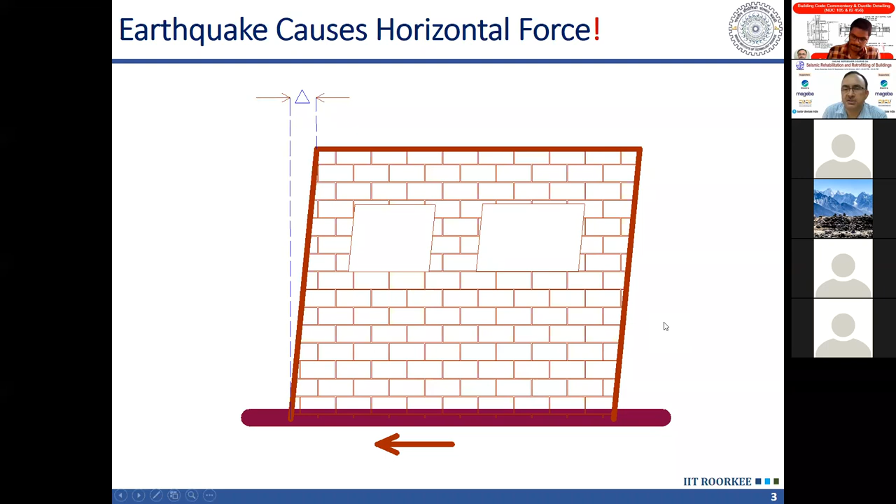The other peculiar characteristic of this earthquake signature, which I had shown you, is that the acceleration is changing its direction rapidly. So it is a reversible type of force acting on our structure, changing direction very rapidly within a fraction of a second, and the total duration is roughly 30 seconds. Within those 30 seconds, you can see how many times it has changed direction.

If we compare it with the other forces we design our structures for - dead load, live load, and wind load - dead load and live load are in the vertical direction, and as I said, our structures are inherently quite strong in the vertical direction, so there is no issue. Easily we can design for dead load and live load. Wind load is in the horizontal direction, which is the similarity with earthquake.

On the other hand, in case of earthquake, the acceleration is fluctuating and changing around the zero line - it is changing its direction. So it is a reverse cyclic type of force acting on the structure, and we take advantage of this reverse cyclic loading, which I am going to discuss soon. This reverse cyclic nature is very important for us in designing structures.

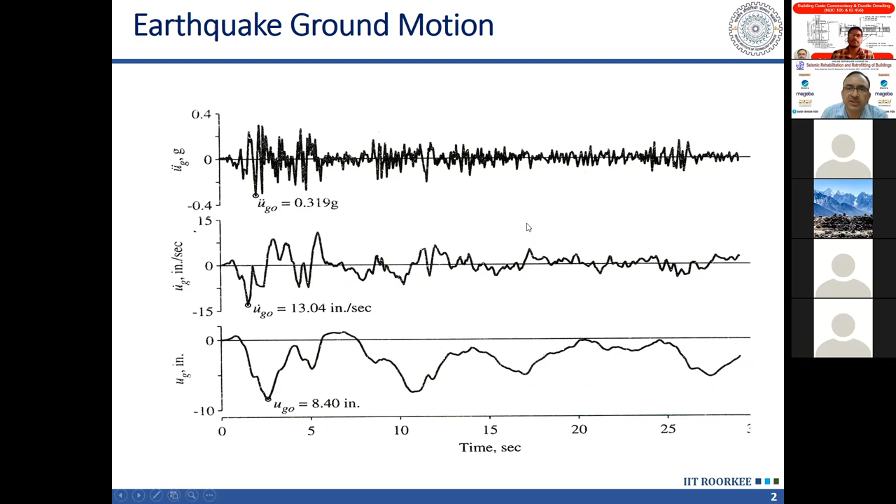To help with that, we have these codes, and I will tell you how the code helps in this.

The first question we have to answer is which earthquake should I design for. If you take some past well-known earthquakes which caused large scale damage, their signatures are very different. Any two earthquakes will never have the same signature, the same accelerogram. So accelerograms are going to be different, and it becomes difficult to decide which recorded earthquake I should use, because the earthquake that will actually affect my structure will be different than all those recorded in the past. So it is a really tough question, which one I should take.

To answer this, we try to understand the different characteristics of ground motions that govern the damage potential of a ground motion. There are three characteristics. One is amplitude of ground motion, which is the peak ground acceleration, peak ground velocity, or peak ground displacement, in short PGA, PGV, and PGD. The larger the amplitude, the more damaging the earthquake will be.

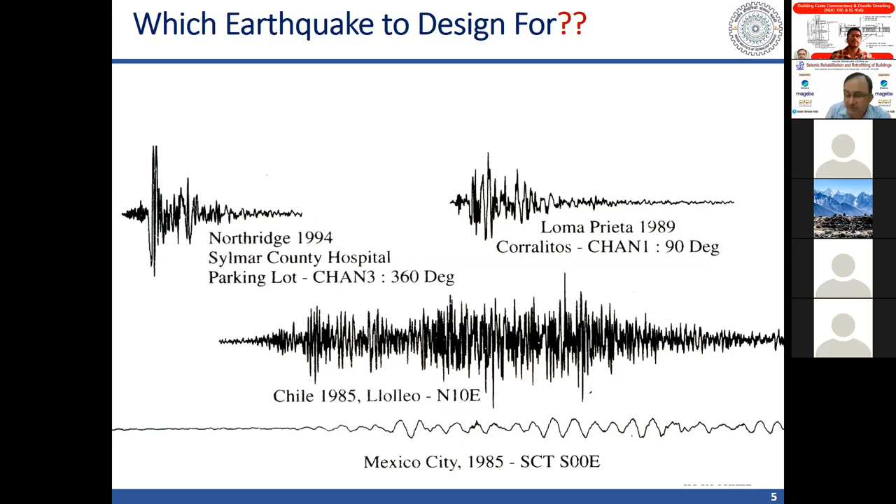So that's why the duration of earthquake is also important. In our modern analysis, using nonlinear time history analysis, we take into account the duration of earthquake also. But in our conventional analysis, we take into account the first two characteristics of the ground motion: amplitude of ground motion and frequency content. Both these properties together can be represented by response spectrum.

I do not know whether you are familiar with the concept of response spectrum or not, but for the benefit of your understanding, I will tell something about that. So if you have a single degree freedom system, you are aware of the concept of the single degree freedom system. It is a simple structure consisting of one mass connected by one column.

So all the mass is here, the column is weightless, and here all the mass is there, and the column is providing the stiffness and damping. This can also be represented by a spring, mass, and dashpot - that is the analytical representation of the same thing. Physically, it represents a single degree freedom system, meaning a single story building. So a single story building, or a water tank, or a column pier can be thought to be similar to the single degree freedom system.

And when the single degree freedom system is subjected to the earthquake ground motion, we will get a response here. So acceleration of this mass will be different than the acceleration of the ground. That will depend on the stiffness and mass, or in other words, the period of vibration of this single degree freedom system. So the period of vibration, or frequency, and damping of this single degree freedom system will decide what response we are going to get.

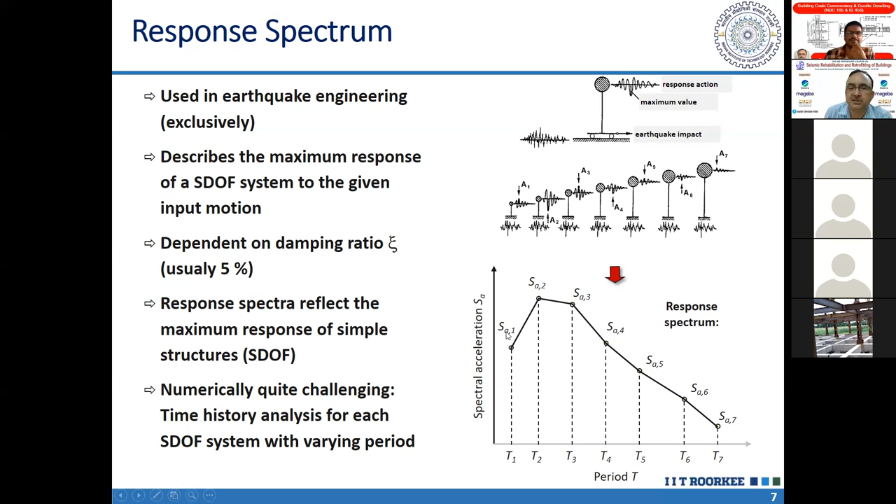It is spectral acceleration. Spectral acceleration is the ratio of the force occurring in this column to the mass - force divided by mass, or force per unit mass. That is the spectral acceleration I can read from this response spectrum.

If I do this for one earthquake, I get a plot like this. Corresponding to zero period here - zero period means my structure has frequency equal to 1 upon 0, infinite frequency. So which type of structure does this represent?

It represents a very rigid structure, which is not vibrating at all. It is moving along with the ground, like a huge block of concrete embedded in the ground, moving along with it. That's why its acceleration will be the same as that of the ground, so the peak value at zero period will be the peak value of this rigid block.

This is nothing but very close to the PGA, peak ground acceleration, and it is called EPGA. Sometimes people just write PGA, but it is not exactly equal - it is close to PGA, but more precisely we call it effective peak ground acceleration, or EPGA. This is very important and used in all our codes, Indian as well as Nepalese. So EPGA means if I have a very rigid concrete block subjected to earthquake shaking, whatever is the peak acceleration of that block, which will be very close to PGA, that we call EPGA.

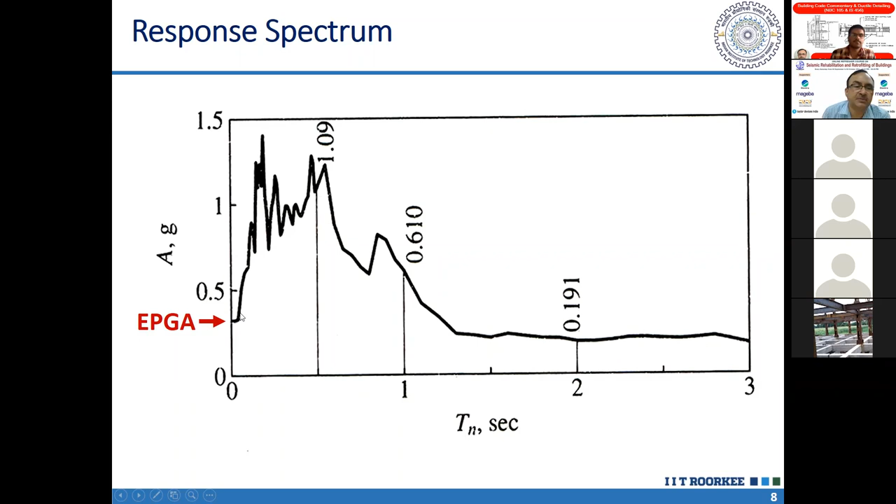And beyond this, it is called long period range, and this is also called velocity control range. So up to 4 seconds, this is velocity control range. If we go beyond that, there is another range which reduces even more rapidly, which we call displacement control range, where the response is controlled by the displacement of the ground. So 3 ranges in response spectrum.

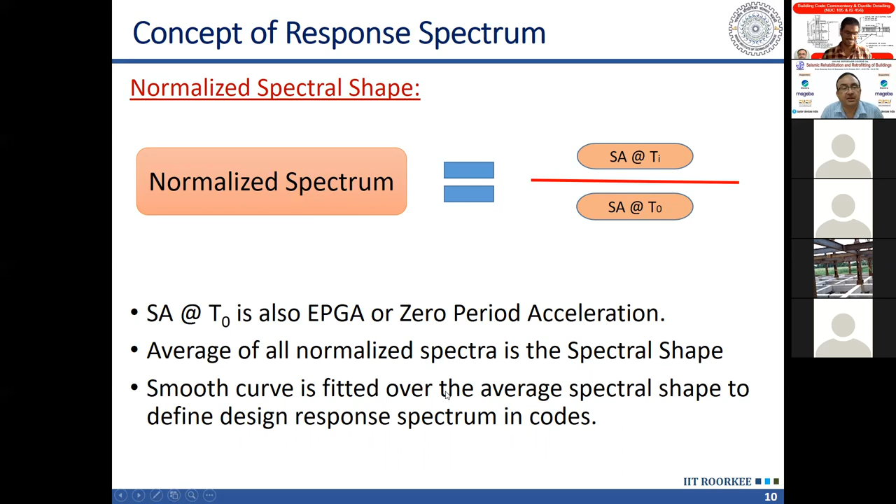I am not getting that video. It's on the left bottom side, sir. Yeah, left bottom. I'm having mute. Stop video after that, start video, stop video. So I have to choose to go, click on virtual background.

Choose virtual background. Okay, I will say none. Somehow my system has remembered that, and that's it. I think that is good, it has gone.

Now we can see your office. I'm sorry, sir, I was seeing it from long back but I thought you had said something, so I was worried I was not able to see, because I was not seeing my video. So anyway, thank you, Tajul.

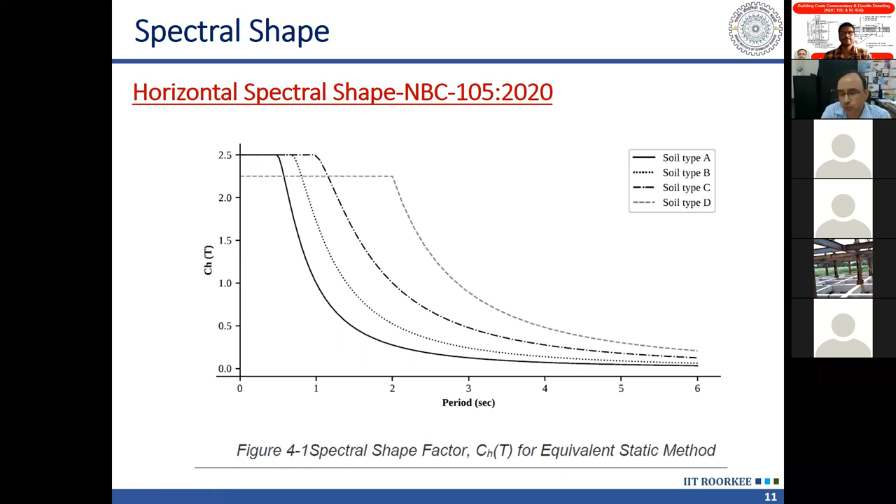All right, so let's continue with our discussion. We were talking about this concept of response spectrum and spectral shape. These spectral shapes are idealized spectral shapes, sort of envelopes, so that for most recorded earthquakes, the response spectrum lies below this or close to this. There should not be large difference.

And the shape depends upon the soil class type. You can see that the width of this flat region depends on the soil type. If you compare it, I will show later a comparison with the Indian code, this is much wider than the Indian code, and I will tell you the reason. In the beginning I said there are some aspects in this code which are more advanced than the Indian code. This is one of those.

So you can see the shape of the response spectra are very different depending on the soil type. Soil type can change the earthquake forces acting on a structure drastically. So far, we have not been giving so much importance to the soil type or site class. Depending on what type of soil or site we have, the earthquake force can increase many times.

For example, if your building is, let us say, 20-story, 2-second period, at 2-second period see how much is the difference. If your structure is on rock, then it is something like 0.3. On the other hand, if it is on soil type D, then you can see it is 2.2. So from 0.3 to 2.2, that's a 7 times increase in the forces. And if somebody has made a mistake in designing a 20-story building in determining its site class...

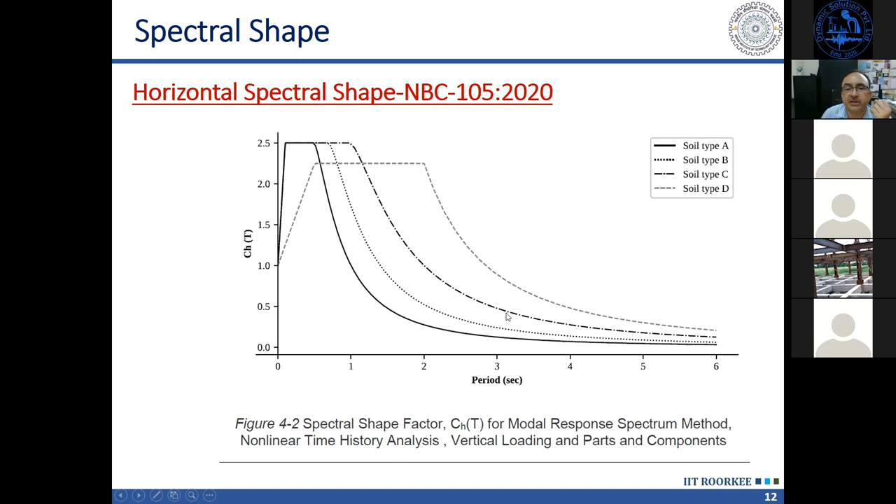Now, why this such large period? Is it possible to have such a flat range? Earlier, if you compare with the Indian code, even the current Indian code, it varies from 0.4 to 0.7, so even for soil type 3 it is 0.7. And here we are talking about 2 seconds, a flat region up to 2 seconds. Why? Is it reasonable? The answer lies in the recent earthquake recording in Kathmandu. In Kathmandu Valley, this was the record.

For such a situation, we have to take care like this. Earlier it was thought that soft soil deposit is a problem of plain areas, flat areas, foothills, the Tarai region. But we are seeing even in valleys deep within the hills, within the Himalaya, wherever we have valleys like Kathmandu Valley, this problem is very severe. So this soil amplification is applicable to hilly regions as well, and the Gorkha earthquake has taught us this lesson.

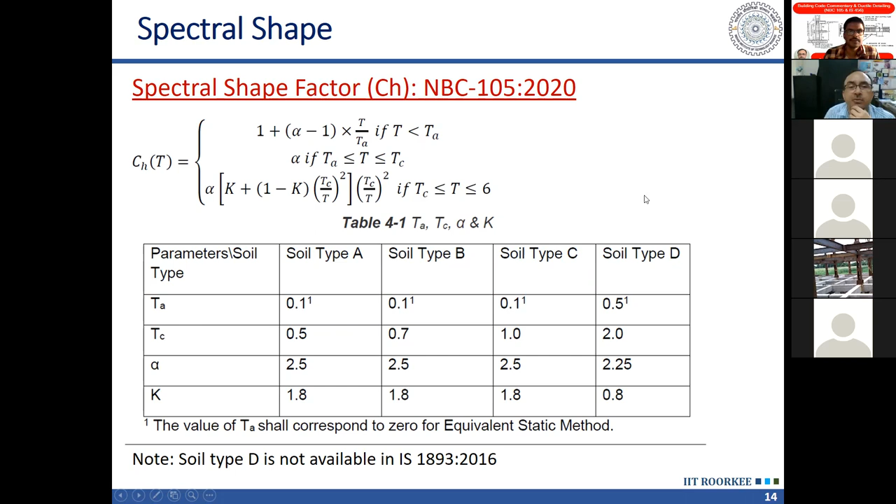Okay, so the same shape is described in terms of these equations and coefficients. These are self-explanatory. Depending on which type of soil you have, you read the value of Ta, Tc, alpha, and K, put them into these formulas, and you will be able to plot the response spectrum.

Okay, now let us compare these provisions with the Indian code. Let us see what happens in case of soil type A. Soil type A is actually rock. In both codes, this is very stiff soil, so it is similar in both. If my structure is located on rock, then soil class A will be applicable.

We can see that the maximum amplification is 2.5 times; in the shape, the maximum value is 2.5. The flat region continues from 0.1 second to 0.5 second. In the Indian code, on rock it continues from 0.1 second to 0.4 second, not 0.5. So here it has been slightly flattened.

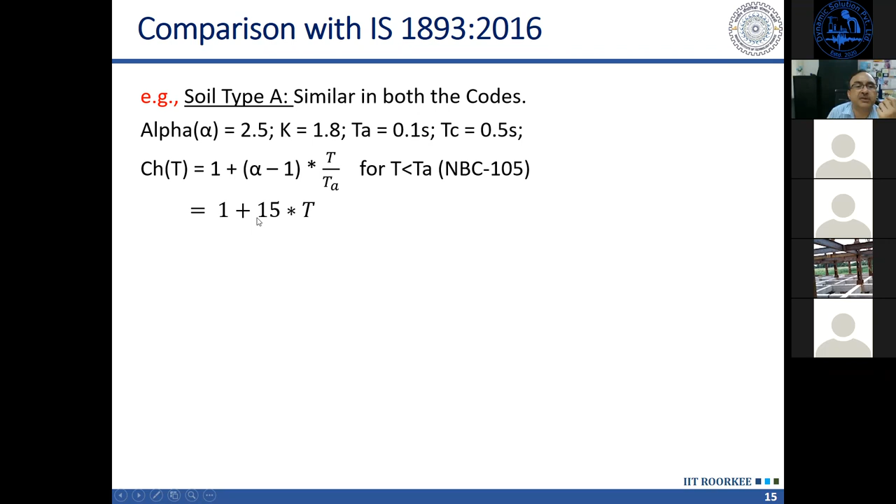And this part, from 0 to 0.1 second, is the same - it comes out to be identical. If you substitute the value of alpha as 2.5 here, you can see it comes out to be the same, 1 plus 15t, as given in the Indian code. So this part is similar, but here we have a significant change.

In the Indian code, in the velocity control range, it is given as 1 by t. Whereas here you see this equation, which means it comes out to be some constant divided by t square minus some constant divided by t to the 4th. So it is reducing with the power of t to the 4 or t to the 2, meaning there is much more rapid reduction.

So there is a very steep reduction in the Nepalese code as compared to the Indian code. In the Indian code, the decrease is relatively mild - proportional to 1 upon t, whereas here it is proportional to 1 upon t to the power 4. So that difference is there. This is a difference from IS 1893.

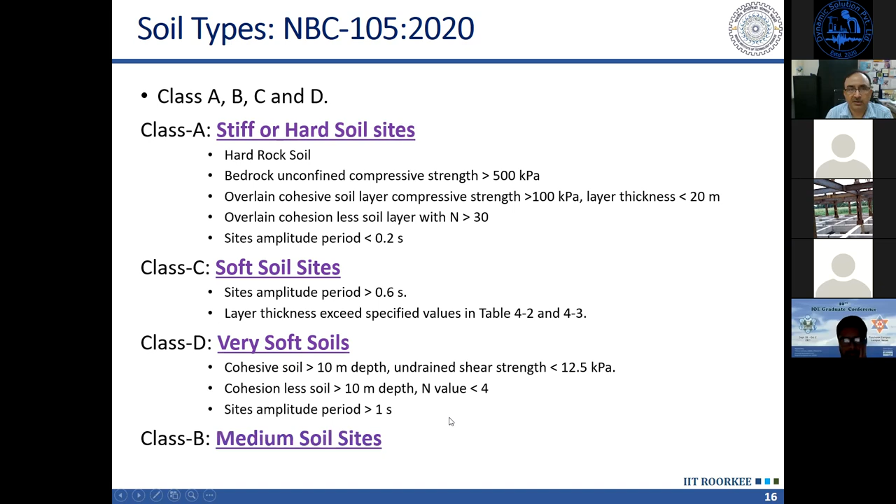Now, different types of soil classifications. In the code, depending on the N value and the type of soil, we can define a site class. A table is given in the code where you can define what soft soil, firm soil, and stiff soil mean based on the depth and undrained shear strength, as well as, in case of cohesionless soil, based on the N value. So here we use N value, here we use undrained shear strength, and accordingly you can define which type of soil it is and assign a site class to it.

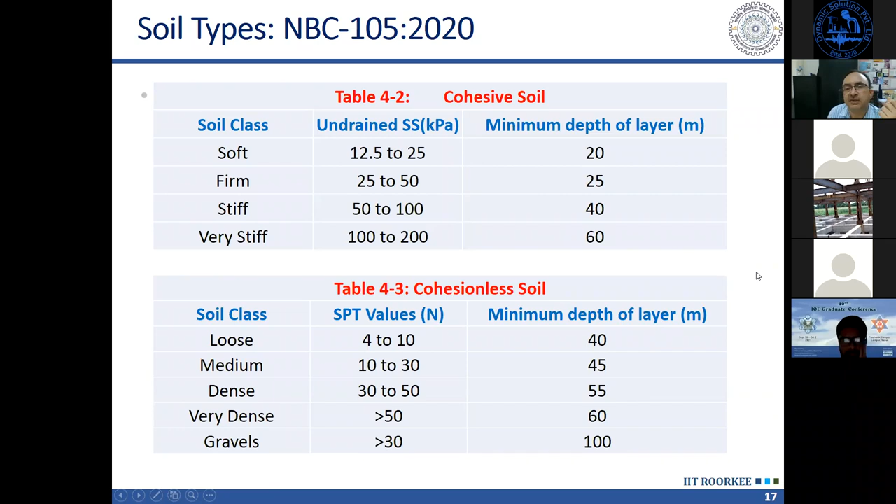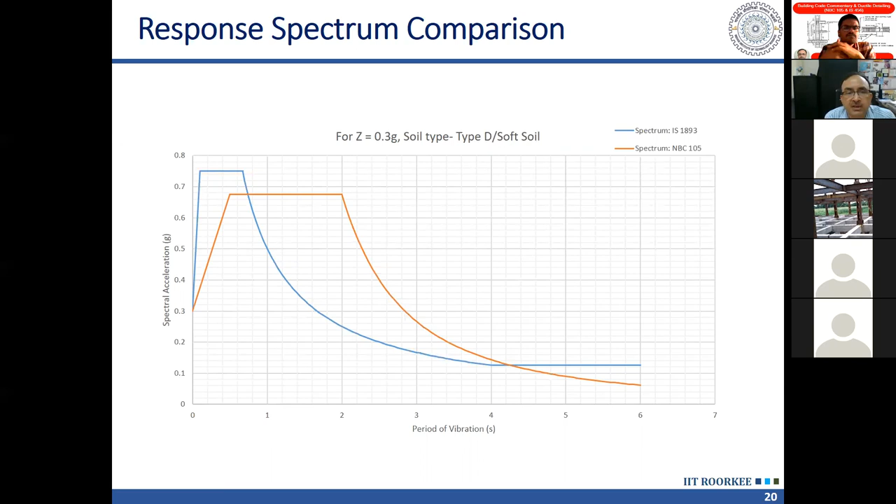We can see how much difference is there in the two codes, especially close to this 2-second period. Between 1 second to 3 seconds, there is a large difference, and most of our buildings will be here. So I'm sure that after this code, the design of buildings in Kathmandu area, where you have the deep soft soil type D, is going to change drastically. The forces in Kathmandu area for design of buildings are going to change a lot after this code, and those are for good.

If you are using, on the other hand, this Indian code, then your design will be non-conservative.

Now, in our quest to define the earthquake level which we should use in our design, we have to define the level of earthquake. So the level of earthquake, which we call hazard level, we define in terms of either a return period or a probability of exceedance. Commonly used probabilities of exceedance are: 50% in 50 years, 20% in 50 years, 10% in 50 years, 5% in 50 years, and 2% in 50 years.

Why 50 years? Because we consider the normal design life of our buildings as 50 years. In case of bridges, it may be more, 100 years or 75 years. But in buildings, usually we consider 50 years as the design life. So the probability of exceedance in the life span of the structure, our buildings. So 2% in 50 years, this is the minimum probability within the lifespan of the structure we have considered, which we call maximum considered earthquake, MCE, and its return period is 2,500 years.

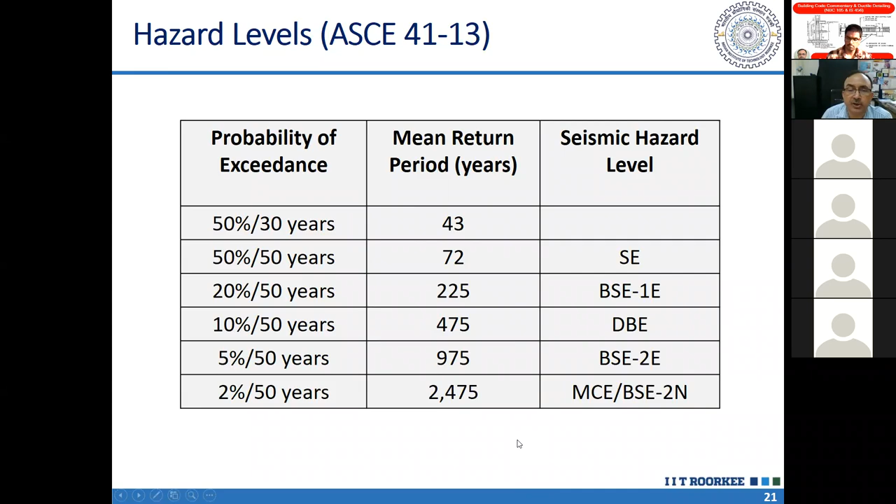Then I have to calculate the earthquake forces, and we use load combinations for design. The load combination given in NBC105 is dead load plus lambda times live load plus earthquake load. Dead load is taken with load factor 1, earthquake load is also taken with load factor 1, and live load is multiplied by this factor lambda, which is actually less than 1 — a fraction, 0.3 or 0.6. I will explain this later from NBC. So this value of lambda is less than 1, either 0.3 or 0.6.

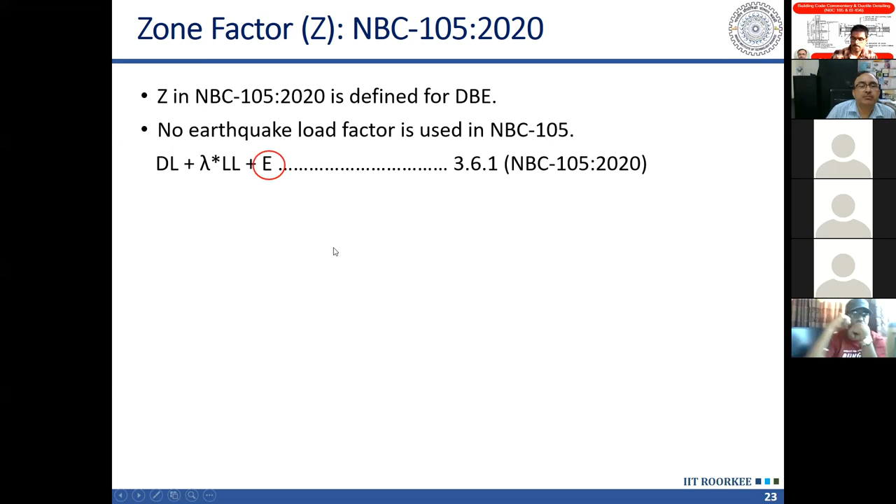This is different from the Indian code. If you compare with the Indian code, here there is no load factor for E, earthquake load, whereas in IS code there is a load factor of 1.2 and 1.5. Two load cases are there: 1.2 dead load plus live load plus earthquake load, and 1.5 dead load plus 1.5 earthquake load. Actually, the governing case is 1.5 dead load plus 1.5 earthquake load, not 1.2 dead load plus live load plus earthquake load.

So this 1.5 factor is actually converting the zone factor. It is not really a load factor, it is a correction factor, because the zone factor adopted in Indian code does not correspond to DBE or MCE. When you multiply it by the 1.5 load factor, it becomes MCE.

So if you compare the zero period acceleration corresponding to DBE from Indian code, for zone 5, which is closest to the Nepal hazard, you can see it will be 1.5 into 0.36, which becomes MCE. Then from MCE to convert to DBE, it divides by 2. So the relationship between MCE and DBE in Indian code is 1:2 — DBE is half of MCE. At some places like the US, that relationship is 1/1.5. That's why there, the relationship to convert MCE to DBE is 2/3 or 1/1.5. In Indian code, it is 1/2, so that comes out to be 0.27.

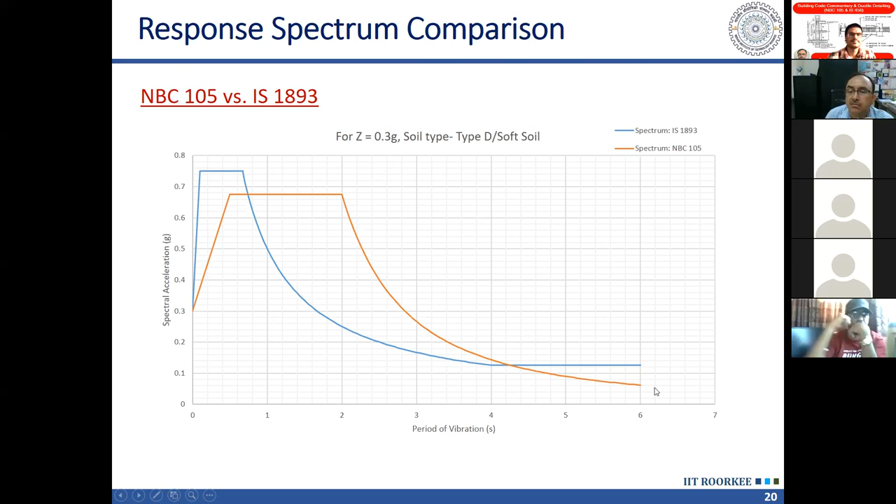This is more logical value which is adopted in Nepalese code. I can understand a lot of problems must be going on currently because the zone factor has increased, the shape of the response spectrum has been changed, and when you consider both effects, the forces on the buildings will be increased tremendously.

The design forces coming on buildings as per this revised NBC will be much higher than what you get from Indian code. These values are more reasonable, let me tell you. The values coming from Indian code are on the lower side, and soon Indian code will also be revised and updated.

I do not know whether those will match exactly with Nepalese code, but those will be close. Earthquake effect is predominantly in horizontal direction, but that doesn't mean earthquake causes only horizontal acceleration. Earthquake causes both horizontal and vertical acceleration, horizontal in two directions and then vertical. So all three components are there, and in general we should consider all three.

So vertical component of earthquake is also important. Previously the codes were not taking into account the vertical ordinate. Now in this NBC105 2020, the vertical component, or this shape of the response spectrum, Cv(Tv), where Tv is the period of structure in vibration in vertical direction.

There appears to be some error in this formula. It is given Cv(Tv) equals 2/3 Z. There is a general understanding world over that the vertical component of earthquake is roughly 2/3 of the stronger horizontal component. But in this formula, Cv(Tv) is actually representing the spectral acceleration, and Z is zero period acceleration. So there should be Ch(Tv) also, which appears to be missing. This means the response spectrum would remain constant, which is not possible.

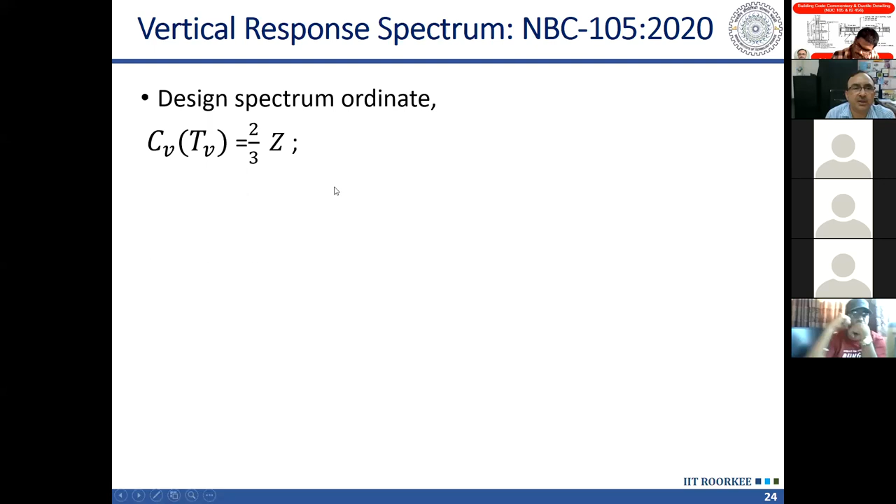What I feel is that it should have been multiplied by CH also, which we have in case of horizontal seismic coefficient. So that should also come. Please check and also discuss it with the code committee, they may look into it. There appears to be a typo error here.

As I said, in general vertical component is acting on all structures, and it is good practice to consider the vertical component of earthquake in all cases. In most cases it will not affect the design, because in vertical direction our structures are anyhow quite strong. I told you that in vertical direction 1G acceleration due to gravity is always acting, and there is a factor of safety of 1.5 to 2. So the capacity in vertical direction is very large and it generally doesn't affect the design.

But in some special cases this can affect. When we have long span roofs or bridges, there it is important, where the span is more than 20 meters, the vertical component can affect. When we have horizontal cantilever span greater than 5 meters, like a balcony, then also this vertical component of earthquake motion is important.

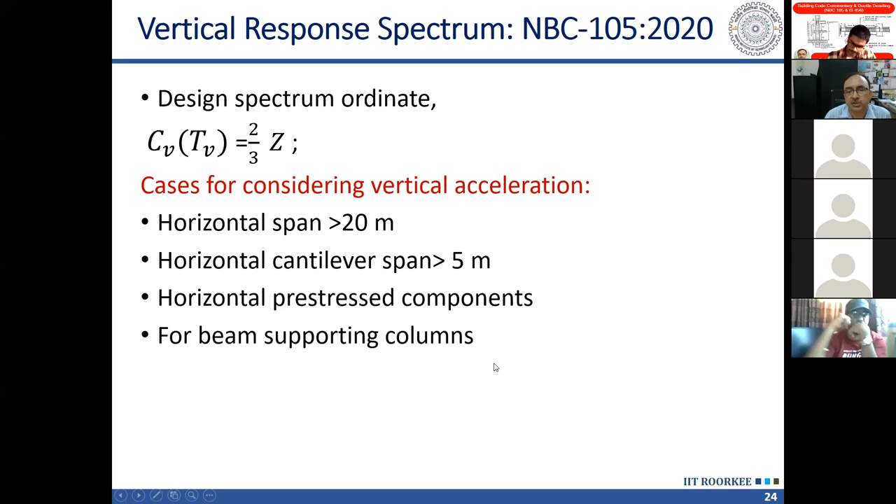And when we have pre-stressed components in horizontal direction, then also we should consider the vertical component. And those beams which are supporting columns, you understand what that means, it means floating columns. So in buildings where you have floating columns, the transfer girders or transfer beams supporting the column need to be designed for this vertical component also, there the vertical component can be important. And then in base isolated structures also it is important.

Now, if I have to calculate the design spectrum ordinate, design spectrum will be calculated from the shape. As I told you earlier, Ch(T) is representing the shape, it is the normalized shape. That shape needs to be multiplied by Z, and another factor is importance factor. Importance factor depends on the uses of the building, what are the post-earthquake uses of the building, and is there any post-earthquake hazard due to that building. So that importance factor will come from there.

I have written here, although it is not given in the code explicitly, please see this note is from our side, that here the Z is to be replaced by 2/3 Z, rest of it should remain the same. So rather than what is given here that Cv(Tv) is 2/3 Z, the C in vertical direction should be equal to Ch(T).

This Ch(T) will remain same. Only thing is that in place of T, we will have TV, and this should be 2/3 Z. That's how it should be used, like we are doing 2/3 of the horizontal seismic coefficient in case of Indian code.

In case of Indian code, we use Z/2 to convert MCE to DBE. I discussed that. And in case of NBC, the Z is defined for DBE itself. The Z is not defined for MCE. And this is again a better approach than defining MCE first and then converting it to DBE, because we need a factor to convert from MCE to DBE.

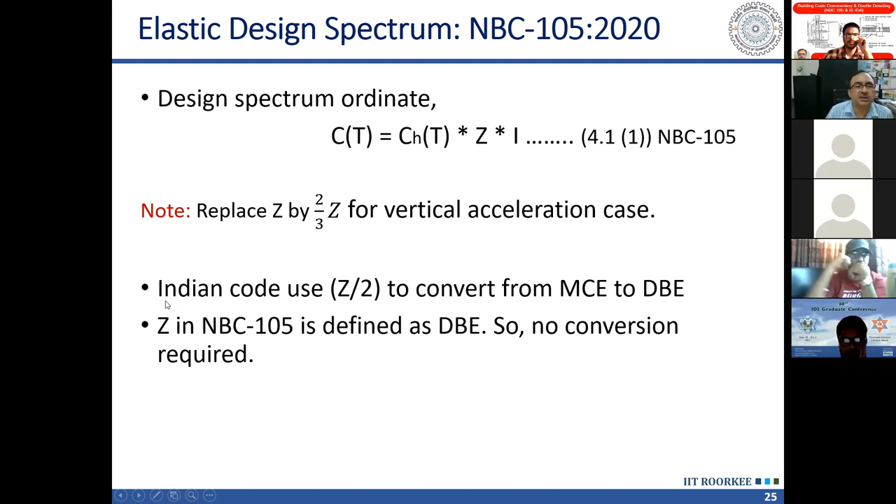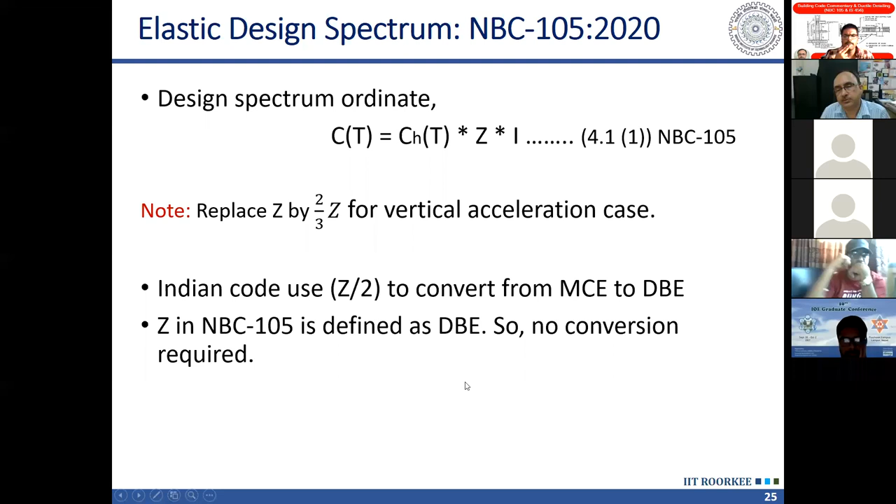In fact, in Europe, this is the practice. If you look at Eurocode, the hazard is defined for DBE, but in American code, the hazard is defined for MCE. So Indian code is similar to American code, and Eurocode is similar to Nepalese code, where the hazard is defined for DBE.

If the earthquake is having all the 3 components, in design also we should take all the 3 components. In general we should consider all the 3 components of earthquake together. But if the structural system is having orthogonal arrangement of lateral load resisting elements - what is meant by orthogonal system? This is a type of system where the beams are perpendicular to each other.

If I apply earthquake in X direction, the beams in Y direction will not be subjected to any force. Similarly, if I apply earthquake in Y direction, the beams in X direction will not be subjected to any earthquake force. But what about columns? Due to earthquake, there is not only force in beams, there are forces in columns also. So for the design of columns, it is important that we consider both the earthquake components.

So I recommend that whatever structure you are designing, please consider both components in all structures. But the code, Indian code as well as Nepalese code, allows us to ignore the other component in case of such systems which are having orthogonal beams and columns.

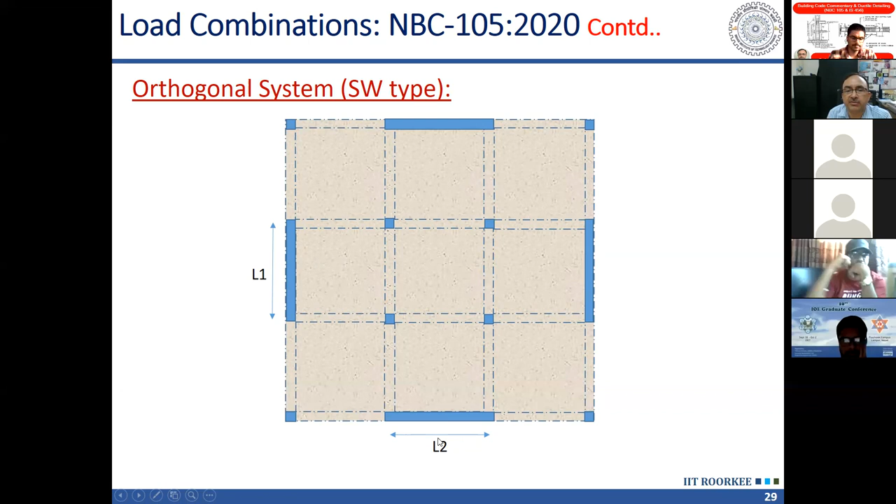This is another orthogonal system where we have shear walls also. When we are applying earthquake force in X direction, then the Y direction components will not be affected. But if we have this type of building configuration where the members are not perpendicular to each other, all the members are not perpendicular to each other,

In case of orthogonal system, the code says that we should consider dead load plus lambda times live load, earthquake in X direction full, and 30% in Z direction. Why 30%? Why not full in Z direction? Z is the vertical direction.

Because if we look at the records of a single earthquake in 3 directions, we will see that those records are non-correlated, meaning they are varying randomly. So when the peak is occurring in one direction, the peak in the other direction is not occurring - it is somewhere below the peak. That's why, because the response spectrum plots the peak response, what we'll be reading from there is the peak response in X and peak response in Z. So both peak responses cannot occur simultaneously.

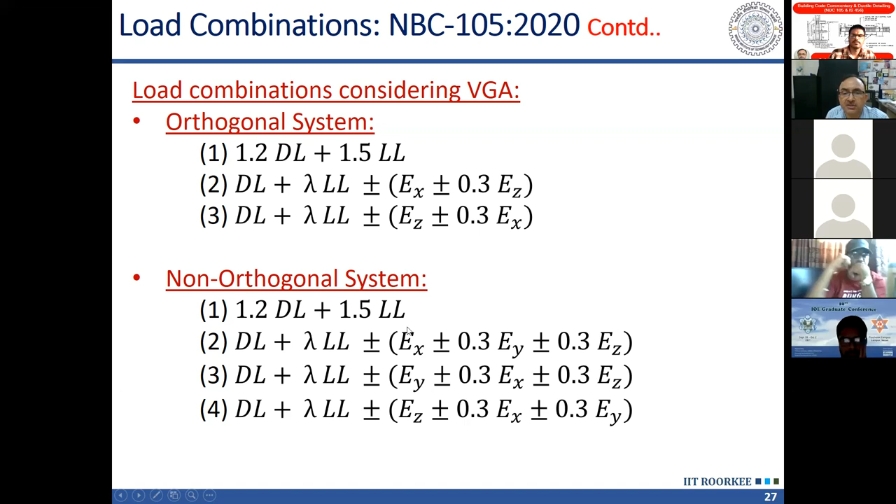That's why we are taking one response as full, other response as 30%. In one combination, X is 100%, Z is 30%. In the other combination, Z is 100%, X is 30%. When we have non-orthogonal systems - and I am saying in case of all systems you should use this - one component is full and the other 2 components are 30%. So first X is full, Y and Z are 30%, then Y is full, X and Z are 30%, then Z is full, and X and Y are 30%. So many combinations you have to consider for earthquake in different directions.

Okay, then importance factor also appeared in our calculation. As I said, that importance factor depends on the uses of the building, for what purpose we are using the building. If the building has some post-earthquake use, for example hospitals, so hospitals will be required after the earthquake, because that's the place where our wounded, injured people will be treated.

So hospitals, then fire stations. After earthquake, there are fires. Then for rescue and relief also, the fire stations are required, or fire brigade people are required. Power stations, so that the power outage is not there. Police headquarters to take care of the command and control after the earthquake has occurred.

Then gas or petroleum distribution facilities. I don't know what is the situation in Kathmandu. Maybe there may be some proposal to have distribution of cooking gas through pipelines. In metros in India, that facility has already come, and it is going to come. We are hearing that in Roorkee also this will be available. So it is good, it is very convenient, but it is dangerous during earthquake. If it fails, if the pipeline ruptures, it will cause fire, post-earthquake fire.

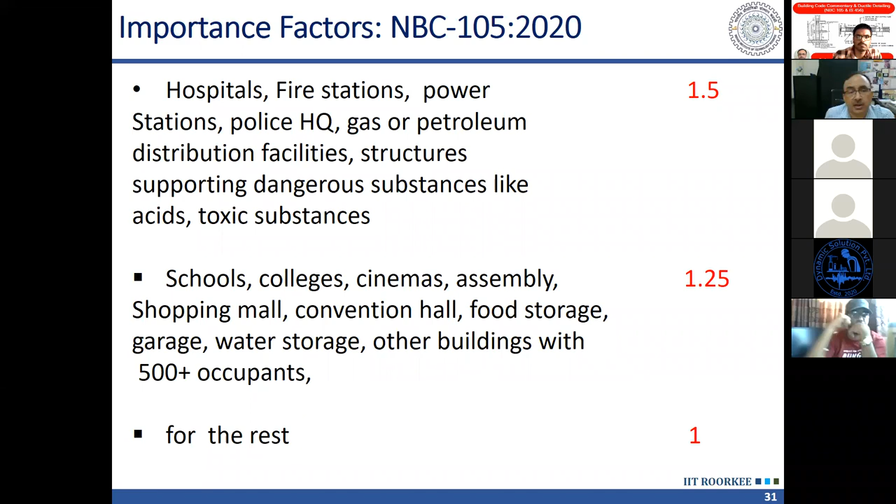So nowadays apartment buildings are coming. In one apartment building itself, there are more than 500 people. So in such buildings, we should have an importance factor of 1.25. This is more or less same in both codes. So this is about the calculation of one aspect of the earthquake force, that is hazard - how to define the hazard and how to calculate our seismic coefficient.

Then another important issue in earthquake is the inelasticity of the structure. We never design our structure to remain elastic during earthquake. So it is going to yield, and when it is yielding, it will have permanent deformation, or what we call plastic deformation or inelastic deformation. So the source of this inelasticity is from the material.

Our structures, RCC structures mostly we are constructing, are made of concrete and steel. Steel is known to be a ductile material. What is meant by ductility? The force goes on increasing rapidly as the deformation increases, or the stress goes on increasing rapidly with strain, up to a point. And at that point, the strain increases either with no increase in the stress or very little increase in the stress. This phenomena is called yielding.

So the point from where the strain starts increasing without increase in stress is similar to flow of fluids. What happens to fluids? The fluids flow under a constant head. If I provide a constant pressure head in a pipe, it will continue to flow. Or if I have an open channel flow with a mild gradient causing a constant head, under that it will go on flowing. So after a particular stress, the metals start behaving like a fluid. This property is called ductility.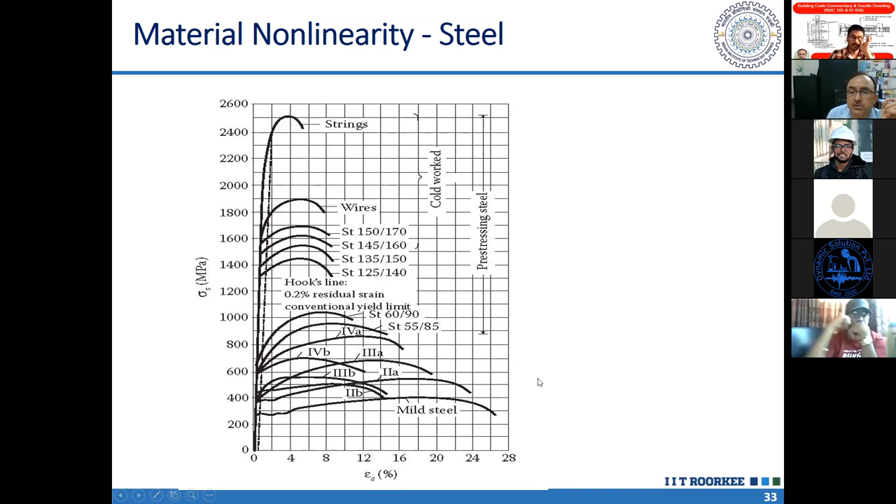Then concrete itself is having nonlinear behavior. Unconfined concrete is very much nonlinear. It achieves a peak and then suddenly it drops its strength - it gets crushed. If we confine the concrete, then we get a much higher strength and much larger ductility, but there is a lot of nonlinearity in this behavior as well.

As a result, the structure which we are constructing - if I apply a force F and measure the displacement on any structure and plot the load displacement curve, the curve will be something like this. It will be linear initially, then yielding will occur, and then it will become nonlinear.

For simplicity in our calculation, we represent this actually nonlinear curve by a simple curve. That simple curve is made of two lines, and we call it bilinear idealization. Bi means two, linear means line. So we are representing it by two lines, bilinear.

This bilinear representation, or bilinear idealization, is done in such a way that the area under the two curves is same. Why are we interested in area? Because the earthquake, which is causing shaking of the building, is actually imparting some energy to the structure, and the structure has to dissipate that energy.

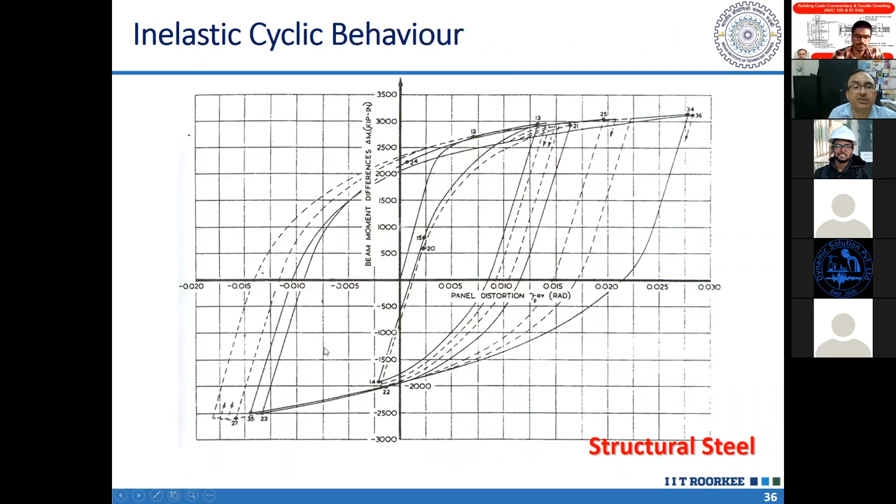Why am I saying hypothetical? Because we never design our structures to remain elastic during earthquake. Rather, our structures yield at some value of Vy. And what is this Vy? This is the point where the two lines in our idealized curve are meeting.

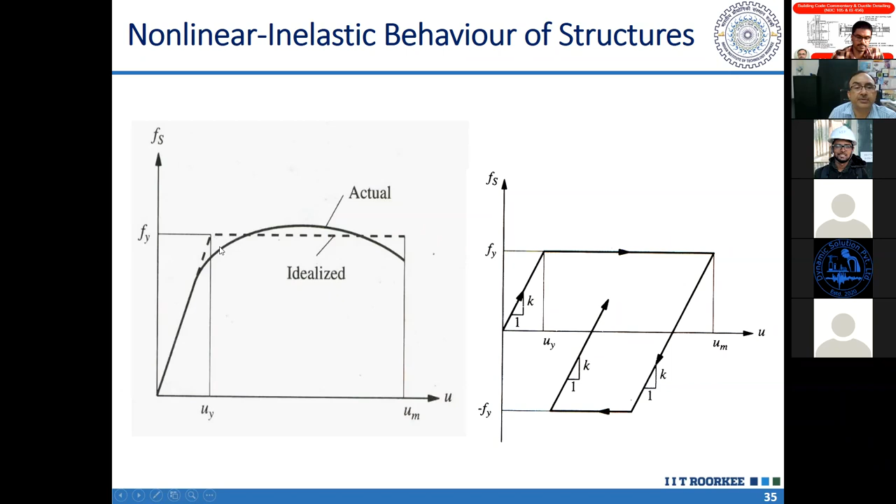So this point is not on the actual load displacement curve. This point is a notional point which lies on this bilinear idealized curve of the load displacement behavior of the structure. So it will yield here, and after yield, the load displacement curve will become flat. The displacement is increasing, but the load is not increasing.

A very interesting observation has been found by researchers analyzing a large number of structures. They found that whether it is a very strong hypothetical structure or a yielding inelastic structure, the maximum displacement remains the same. So this maximum displacement is same as delta E, because whether it is a hypothetical elastic structure or a real yielding structure, the peak displacement will be same.

Delta M will be equal to delta E. And this ratio of V and Vy we represent by R mu, the response reduction factor due to ductility. R mu is defined as the ratio of V by Vy. And from similar triangles, we can see that V by Vy is actually delta E by delta Y, and delta E is same as delta M.

Just now we talked about that observation which we call the equal displacement principle. This principle says that delta M and delta E are the same, so I replace delta E by delta M. Then it becomes delta M by delta Y, and delta M by delta Y is the ductility, the demand ductility on my structure, mu. So R mu is equal to mu. The equal displacement principle suggests that R mu is equal to mu.

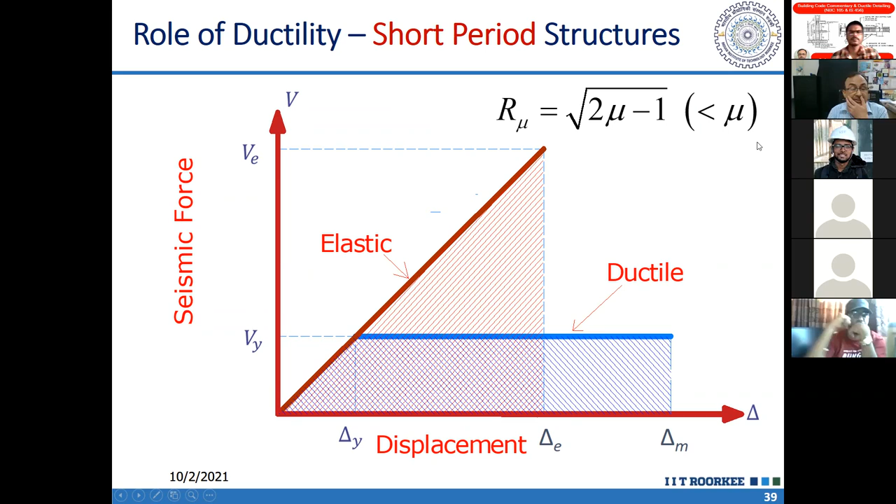And we get this relationship: square root of 2 mu minus 1. In this case, R mu is less than mu, since square root of 2 mu minus 1 is less than mu. So R mu is lower than mu, but still it depends on mu. It is a function of mu only, and mu is the ductility ratio here. So the response reduction factor which we get in our structures depends on the ductility in the structures.

Using this principle, which we call the equal energy principle, we get R mu equals square root of 2 mu minus 1 for short period structures. For long period structures, R mu was equal to mu, using the equal displacement principle. In case of short period structures, which structures do we call short period? Those structures lying in the acceleration control range are called short period structures. As per Indian code, those structures having a period less than 0.7 seconds are called short period.

As per Nepalese code, that period will vary depending on the soil also. In case of stiff soil or rock, structures having period less than 0.5 seconds will be called short period. But in case of very soft soil, structures having period even up to 2 seconds will be called short period structures.

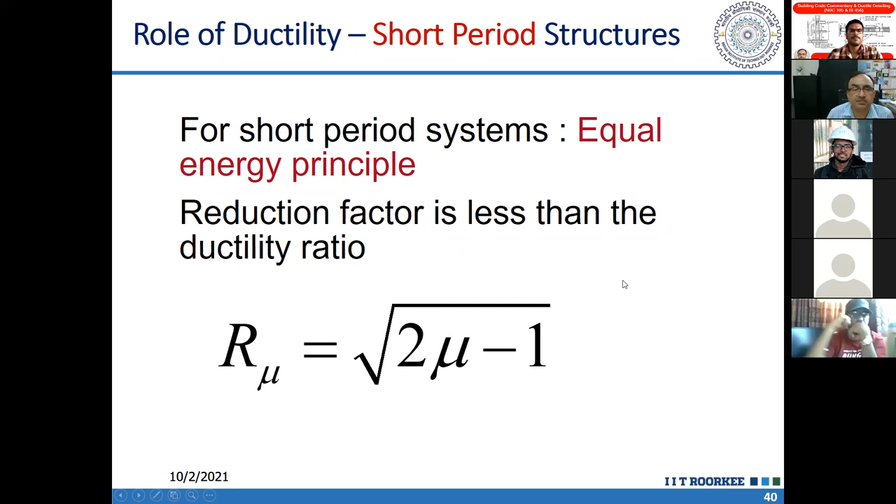So for short period structures, this is the relationship for R mu. Now what is our current philosophy? Taking into account that energy dissipation takes place during earthquake, we first try to determine the demand as realistically as possible. So this is the design response spectrum. This blue curve shows the design response spectrum, and this red curve shows the hypothetical structure. So for the hypothetical structure, the demand will be equal to this much. This is going to be the demand on our structure if it was hypothetically designed for very high strength to remain elastic.

So the elastic forces on our structure will come from the response spectrum directly. Then what we do, we reduce these forces by R, and we design for this reduced force. This reduction is by this factor R.

And when we are designing our structures, we use limit state method. I think in Nepal also we are using limit state method. So we use some partial factors of safety on material, and we use characteristic strength or specified strength, which is 95% confidence strength, whereas the realistic strength is given by the average strength. The most probable value of any quantity is its mean value. So the probable strength of my structure is its mean strength, and mean strength is higher than the characteristic strength.

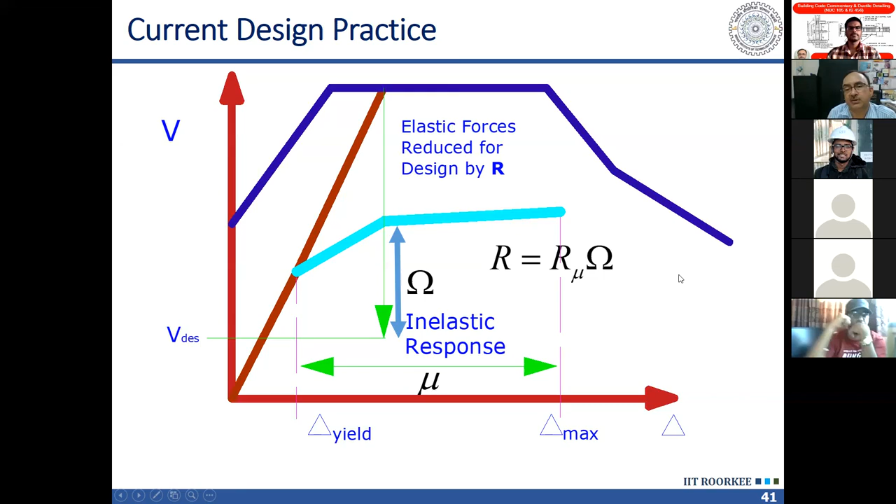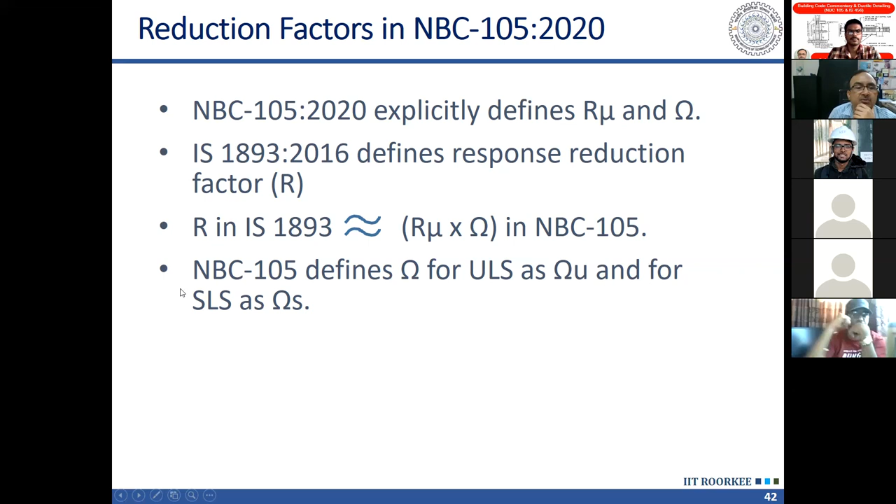Now NBC defines R mu and omega explicitly, separately. Indian code gives the value of R, which is actually the multiplication of R mu and omega. So if we are comparing this R, we should compare it with the product of R mu and omega. In NBC, two values of omega are given - one for ultimate limit state, denoted by omega u, and another for serviceability limit state, given by omega s. Now this is the table, some of you might have already seen.

Values of R mu and omega u and omega s for different types of structures are given - for moment resisting frames, braced frames, structural wall systems, and dual systems. Some of the common systems I have done a comparison here. So the common systems are, first of all, an RC building which is a special moment resisting frame. For this RC building, special moment resisting frame, the value of R mu is 4 and omega u is 1.5.

So this product is 6, which is to be compared with the R value given in the Indian code, which is 5. So here we can see that the NBC is allowing a slightly larger, 20% larger reduction. So in many things it was conservative as compared to Indian code, but in some things it is slightly, not much, slightly non-conservative. If it is a steel building, then also it is the same in both codes, 6 in Nepalese code and 5 in the Indian code.

Then special shear walls, this is important. If I'm having a building made of shear walls, and those shear walls are detailed for ductile reinforcement, then R mu is 3, omega u is 1.3. This comes out to be 3.9. In Indian code, it is 4. It's very close, 3.9 and 4.

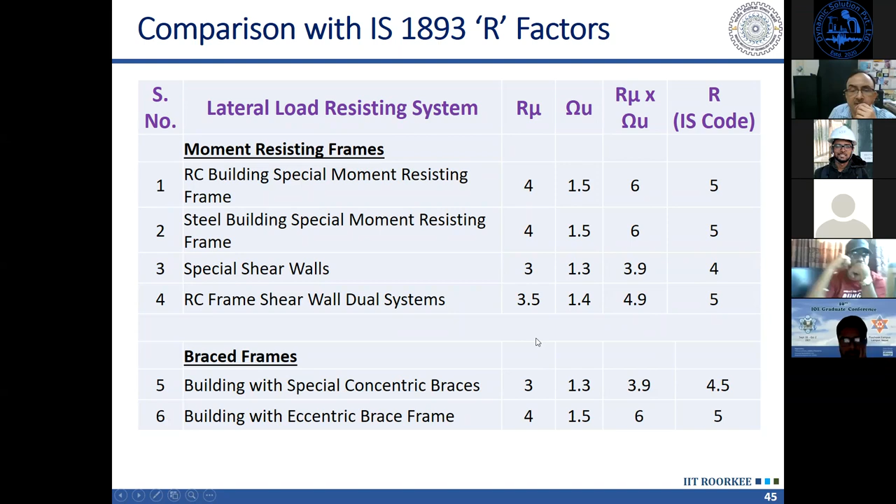Similar comparison has been done for masonry buildings also. So in masonry buildings, you can see this is more or less comparable. Both codes are giving similar values, because this response reduction factor for masonry buildings is perhaps not available in any other code, as far as I understand. So when they were developing the Nepalese code, they must have also tried to tally it with the Indian code, so it is very close to the Indian code.

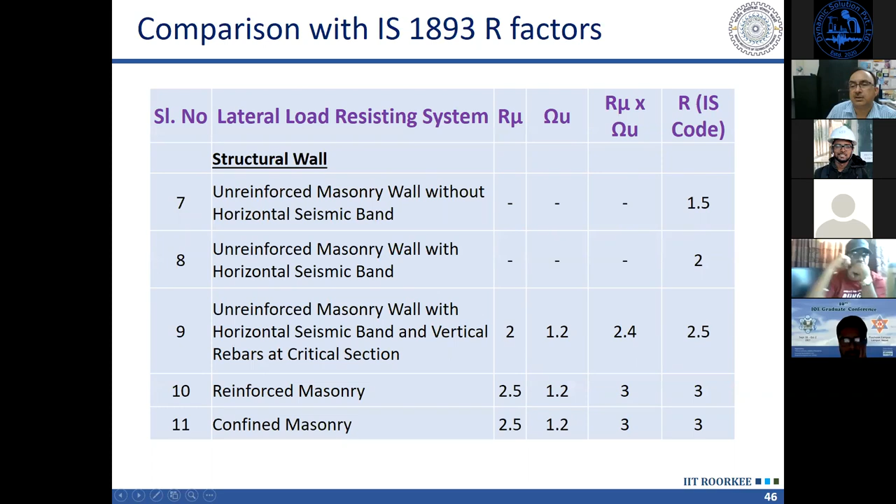Now that completes our behavior of the structure towards calculation of earthquake forces. Now, for method of analysis, we need to understand the dynamic behavior of the structure. And for understanding dynamic behavior of a structure, I will just give you an overview of some important topics, and one such topic is modes of vibration and fundamental period.

This is important. Every building, or every structure for that matter, has some natural modes of vibration. When we say that a structure is vibrating in a natural mode, these are the characteristic deflected shapes. When the structure is vibrating with these characteristic deflected shapes, all the mass particles on the structure are vibrating with the same frequency, meaning they vibrate together. If one particle starts vibrating, the other particle will also start moving. So these will attain their zero position simultaneously, and their maximum position also simultaneously. This is called natural modes of vibration.

The number of natural modes of vibration in any structure is equal to the number of degrees of freedom in the structure. And each characteristic deflected shape is also called a mode shape.

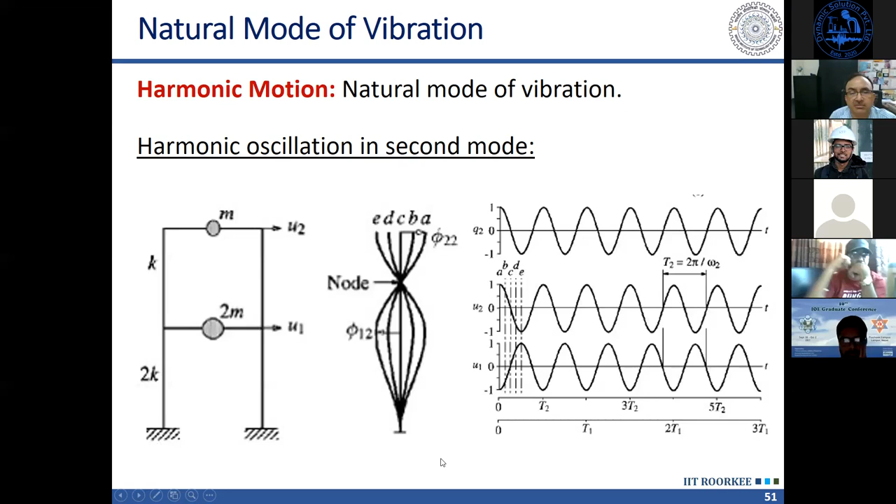In the same manner, we can have third, fourth, and fifth modes, which go on increasing. Now why are we interested in these modes of vibration? Because these simplify our calculation drastically.

In reality, we will be designing multi-story buildings. Multi-story buildings are multi-degree freedom systems, and their response is quite complicated. I have to solve that using computers, and even with computers it will take a lot of time. So this solution can be simplified a lot if I make use of multi-degree freedom system vibration modes.

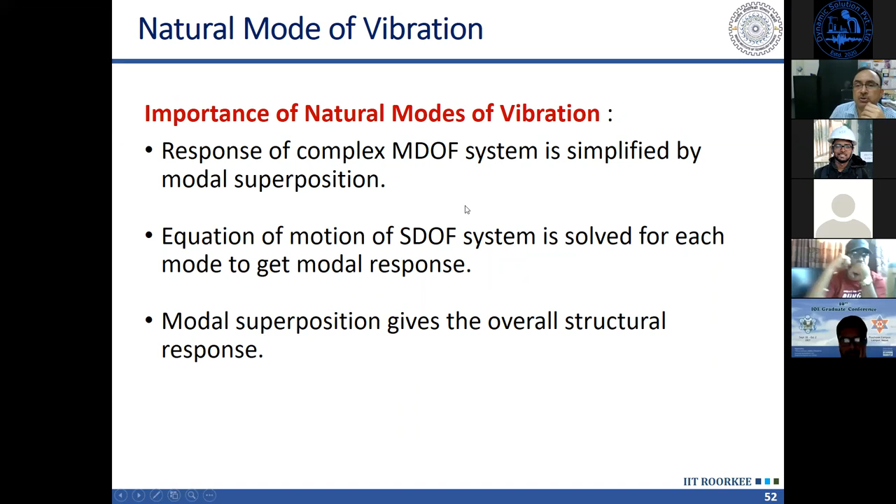So the response of a multi-story building can be thought of as the response of a number of single degree freedom systems. This multi-degree freedom system, or multi-story building, has several modes of vibration.

How many modes will we have? The number of modes will be equal to the number of degrees of freedom. But in case of buildings, the significant modes are there in the horizontal direction only, because there are so many degrees of freedom. So out of those floor degrees of freedom, the number of modes is actually equal to the number of stories in each direction.

If you perform a frame analysis, you can get more modes than the number of stories. But here, some of the modes are not having much contribution. Further, the contribution of these modes goes on decreasing as we move from lower to higher modes. And these modes are such that the first mode is having the longest period, then the period goes on reducing.

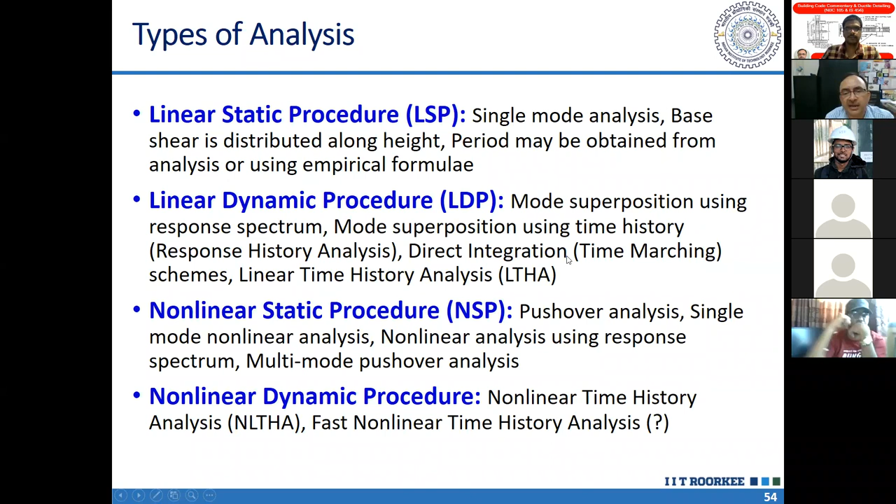The response of the single degree freedom system I can read directly from the response spectrum if I know the period, and this period is the fundamental period of the building. This can come either from analysis or from the empirical formula given in the code. Both the codes, Indian code as well as Nepalese code, give empirical formulae for calculation of the period.

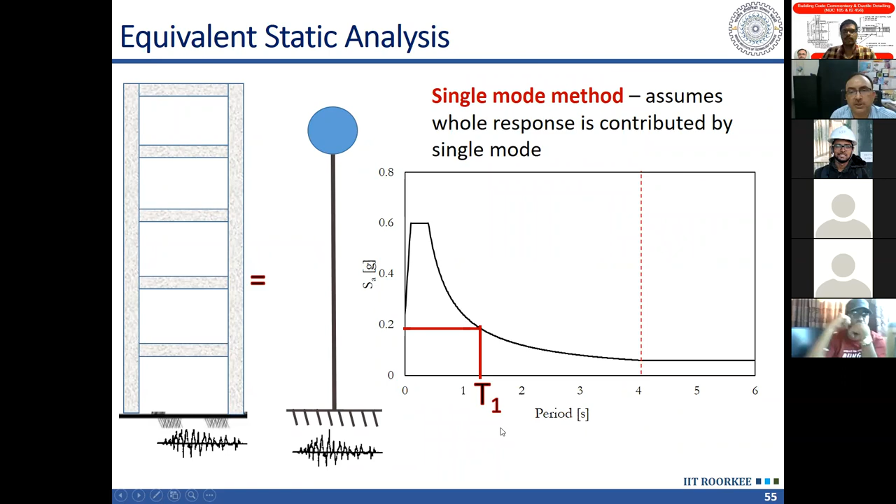Then the next method, which I was calling the linear dynamic procedure. In linear dynamic procedure, two possibilities are there. One possibility is that I analyze this building to the ground motion applied here, considering a multi-degree freedom system. In multi-degree freedom system and single degree freedom system, what is the difference?

The mass and stiffness in a single degree freedom system are scalar quantities, given by a single value. Whereas in a multi-degree freedom system, these are given by matrices. So I get stiffness matrix, mass matrix, and damping matrix. I can solve those equations in terms of matrices directly, and that we call linear time history analysis.

So I can perform a time history analysis directly over the structure. Alternatively, what I can do is consider the different modes or the single degree freedom systems corresponding to different modes of the building, apply the same time history here, and get the response of each of these time histories. Then I have to just add these time history responses in all the modes, and that will give me the same response as here.

So if I add those together, I will get the response of the building, and there is no error here. There is no approximation if I am considering all the modes. But we know that the contribution of the higher modes is very small. So to save time, we can consider only a few initial modes, get the response of those, and sum that up.

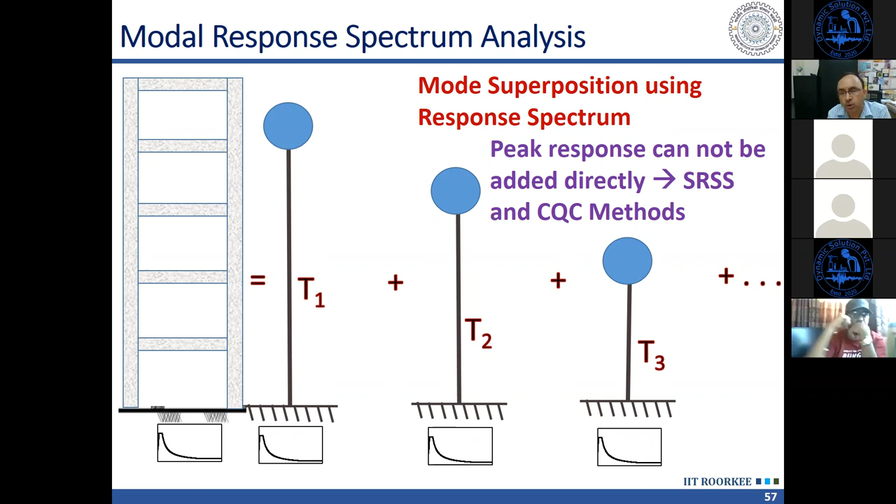If the building has well separated modes, meaning the periods T1, T2, T3, etc. are different, at least 15% different from each other, then you can use SRSS. But if these periods are very close to each other, or any two periods are close, then you cannot use SRSS. In that case, you should go for CQC.

The third method, which I mentioned, is the time history analysis, which is direct integration of the simultaneous equations, and we get the response at each floor level. This is the most rigorous method. All the modes' contributions are inherently considered.

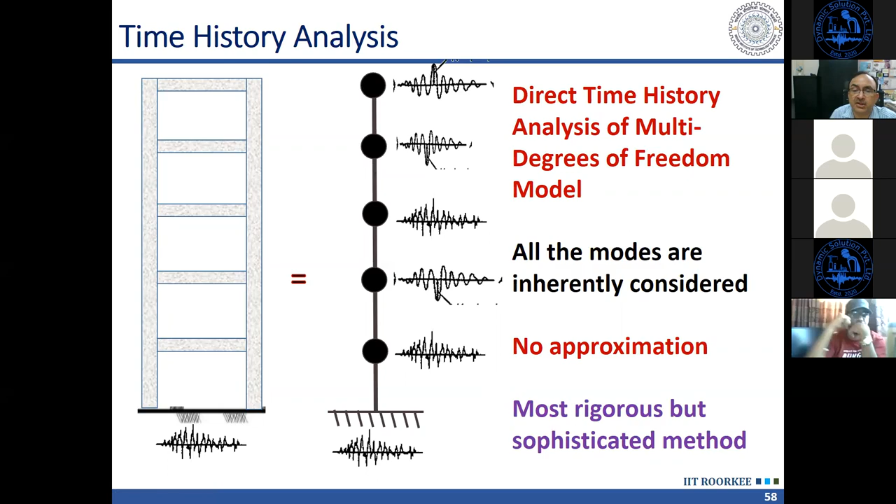This is very sophisticated. The problem is in selection of time histories, because the codes provide response spectra, not time history. That's a big problem—which time history should I use? That is the challenge, and we need skill in selecting. There are methods and procedures by which we should properly select the time histories to apply on the structure. Getting the response spectrum is very easy, which is why most designs are done using response spectrum.

Even if we want to use the simplest method, the equivalent static method or linear static procedure, I need to calculate the period. That period can be obtained either by performing free vibration analysis in a computer model, or I can use the Rayleigh method, a simplified method based on stiffness and mass matrices, or I can use empirical formulae, which are given in the codes.

There is a difference between Indian code and Nepalese code here: Nepalese code allows an increase in the empirical period by 25%, so a 1.25 amplification factor is allowed. This is similar to American code, but Indian code does not allow any amplification factor.

As a result, usually the empirical period calculated using the code formula is much shorter than the period obtained from ETABS or other computer analysis. So the computer model analysis gives a longer period, whereas the empirical formula gives a shorter period. When calculating the design base shear, the empirical formula will give much higher base shear than what you get from the analytical method.

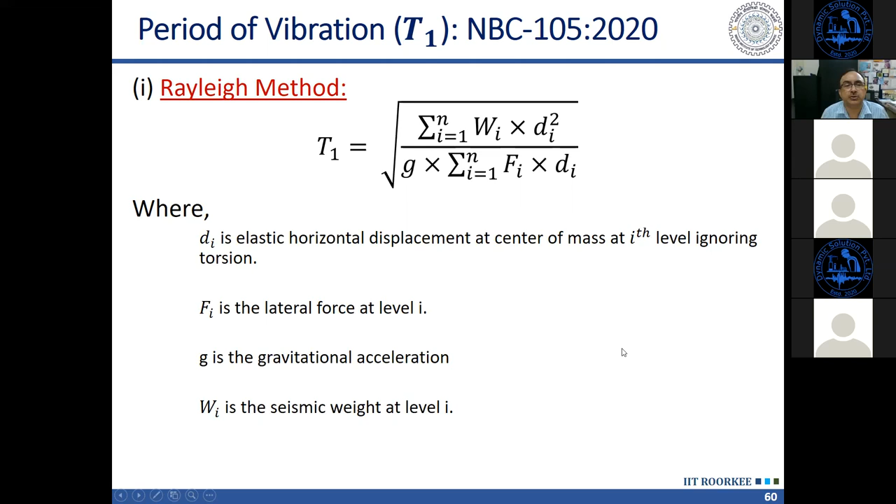Then there are empirical formulas in NBC as well as Indian code. The form is like this: 1.25 kT into h to the power 3/4. So kT is the constant which varies from building type to building type. In Indian code, there are other formulae also which may be much more stringent.

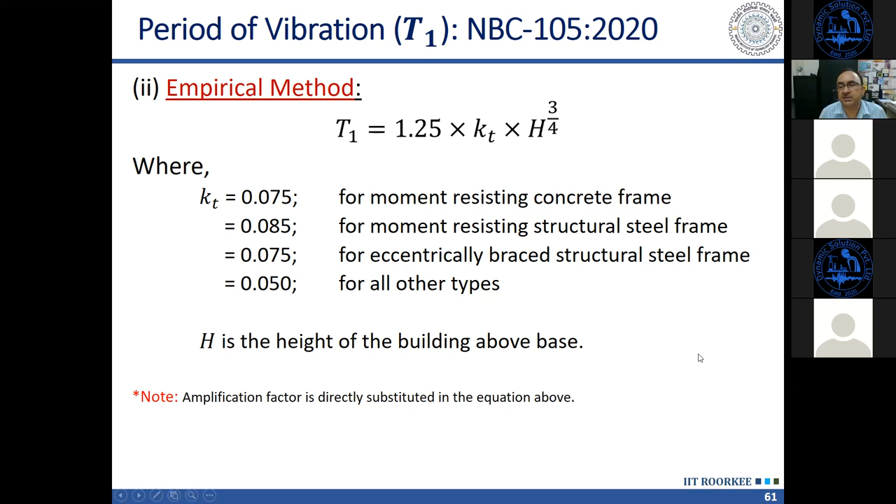So you will see that Nepali code, which was quite stringent, was giving much larger forces, much larger hazard value. The value of SA when we were calculating was much higher. But here it is not that stringent. Indian code is more stringent in this aspect, and that's why it's more or less compensated. So although it is designing for lower hazard value, there is a lot of overstrength, and because of that overstrength, it performs well even under the real hazard value.

If we compare these empirical formulas for period with IS1893, here KT is given as 0.075 for RCC frame, 0.085 for steel frame, and 0.075 for eccentrically braced steel frame. In IS1893, these values are slightly different, and NBC uses 0.05 empirical coefficient KT for all other types of structural walls, whereas in Indian code, there is a formula 0.09 H by square root D, which is quite conservative and gives very short periods.

While calculating earthquake forces, we consider the full dead load and a percentage of live load, and that percentage depends on the occupancy type of the structure. If it is a storage facility where the permanent component of live load is more, we take this factor as 0.6. For normal residential buildings where the permanent component is less, we have this factor as 0.3. In Indian code, it is 0.25 and 0.5.

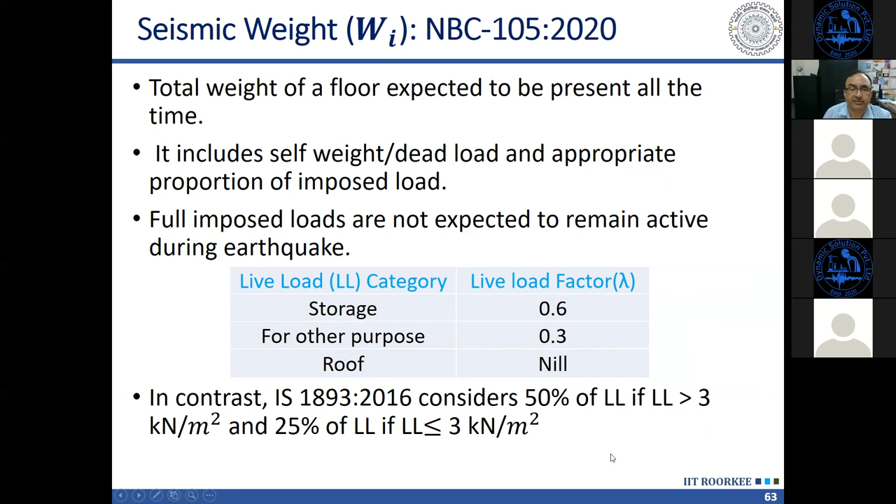Now we can sum up the procedure. We have understood all the background concepts. So if I have to calculate the base shear on any structure using the equivalent static method, I can obtain it like this: CD at the fundamental period into W. How will we get CD? CD will come from CH, Z, I, and this is giving us the force on an elastic structure. We need to obtain the force on the real structure, so real structure force will be this much, which will be CT1 divided by R mu into omega mu.

So C was on the elastic structure, divided by R mu into omega mu, then it becomes the real structure, which is inelastic and going to yield, where we can reduce the forces. So there is a reduction factor on the force. Then we can substitute this expression: if I substitute for C, CHT1 Z into I, I can calculate the shear force like this. These expressions are there in the code; you must already be knowing these.

Then the shear force which I am getting from here, suppose I am using the period which is coming analytically, that needs to be scaled for the shear force I am getting from the equivalent static method using the empirical formula for period. So VES is based on the empirical formula, and VMRS may be using the response spectrum method or any other method, but it is coming from analysis, where analytical period is considered. So the shear force needs to be increased by this scale factor, and all the member forces will be multiplied by this scale factor.

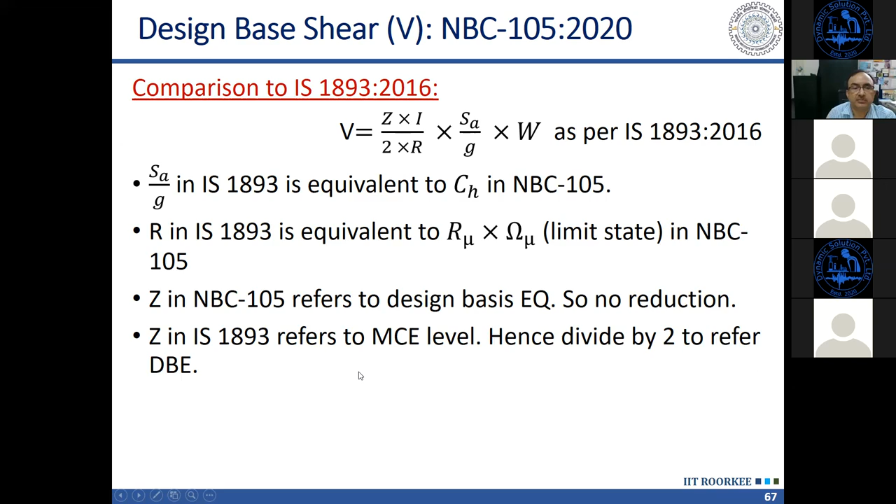The next important parameter we need for design is the force. Force comes from the base shear. Then the other important parameter is displacement. There are checks on displacement also.

In Indian code, whatever displacement you calculate from the design, the same displacement is checked for the drift limits. But in NBC, the Nepalese code, the design displacement is obtained from the calculated displacement multiplied by factor R mu. So the displacement is the calculated displacement into R mu, and the drift is displacement divided by height, which is nothing but the interstory drift ratio.

So in Nepalese code, this drift ratio is 0.025. On the other hand, in Indian code, this limit is 0.004. You may be confused how this can be so different. It is 0.025 here, it is 0.004 here.

Actually, what is given in Indian code corresponds to the design load, that means the reduced load, so the displacement is also reduced. But recall the equal displacement principle: the forces can be reduced, but not the displacement. Displacements are the same, so by the factor by which we reduced the forces, by the same factor we have to multiply this displacement, so that the displacement of elastic and inelastic structure is the same.

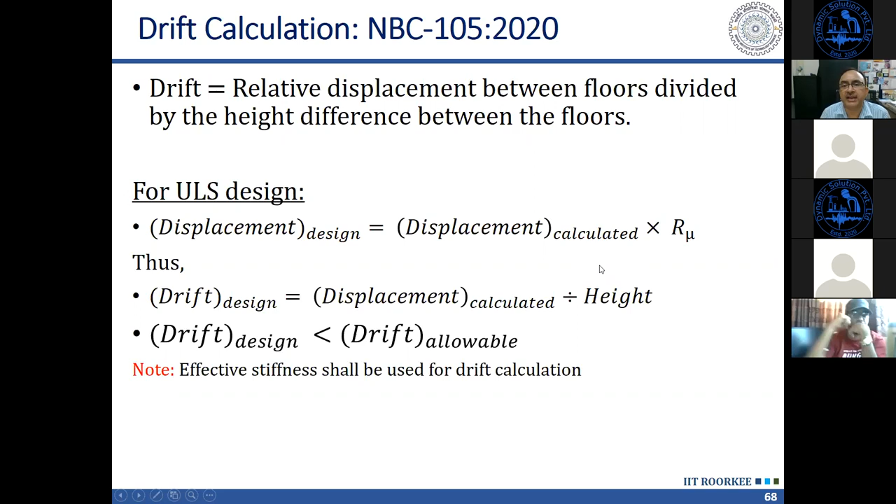So this should be multiplied by omega u also, as it is in Indian code. Whatever factor we are using for reduction of forces, the displacement should be amplified by the same factor, so that we get the displacement that will actually occur during the earthquake. So the reduction is done by R mu into omega u, so multiplication of displacement should also be by the same factor.

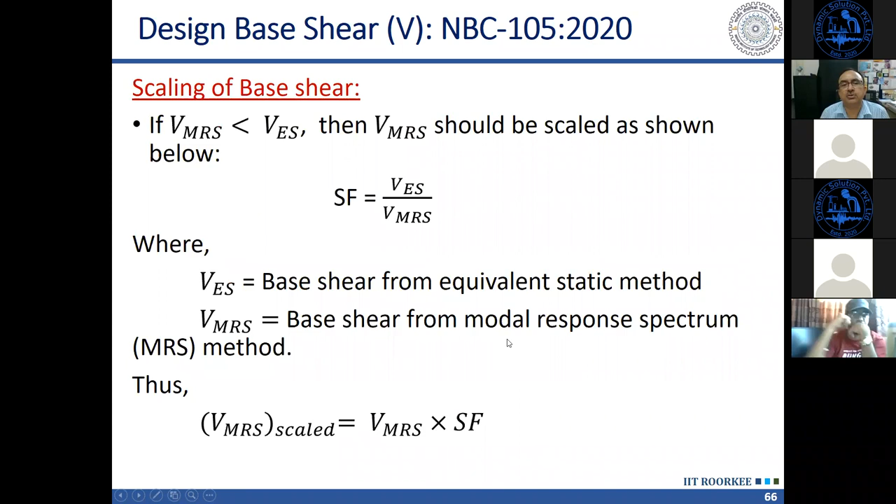Then the Nepalese code also defines the serviceability limit state. In serviceability limit state, CD is obtained just by dividing CS by omega s. There is no R mu here. Why? Because the name itself suggests serviceability condition — the structure should remain in service, there should not be any damage.

This means we are not allowing our structure to yield. And if the structure is not yielding, there will not be any energy dissipation, there will not be any reduction, there will not be any ductility. So R mu, or mu, will be equal to 1.

And we will have only omega in this case. So R will be 1 into omega, that is omega. So omega S, and there is a separate column in that table for omega S. Omega S is also slightly lower than omega U.

And then CS is considered as 20% of C at T1. So the serviceability earthquake is considered 1/5 of the DBE.

It is not specified in the code which probability of exceedance they are considering. Normally we consider 50% probability of exceedance in 50 years, which corresponds to a return period of 75 years. But that will not be 1/5 of this. That comes out to be roughly half of DBE. It is even lower than that.

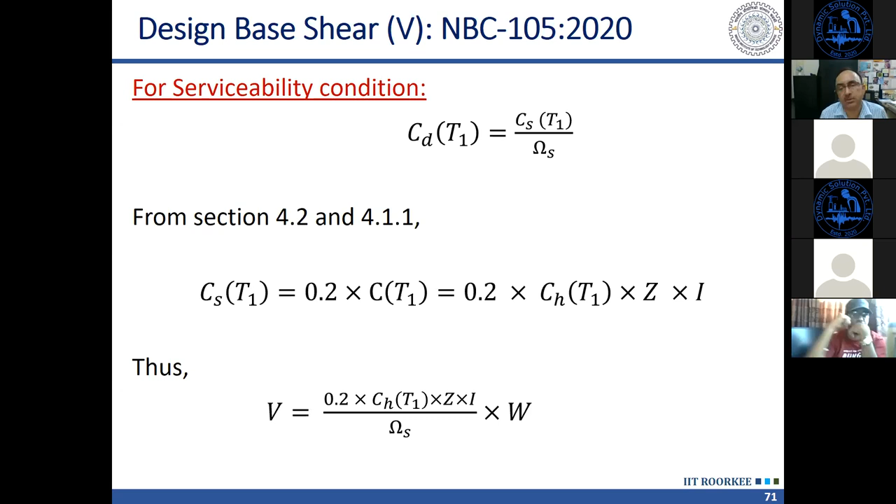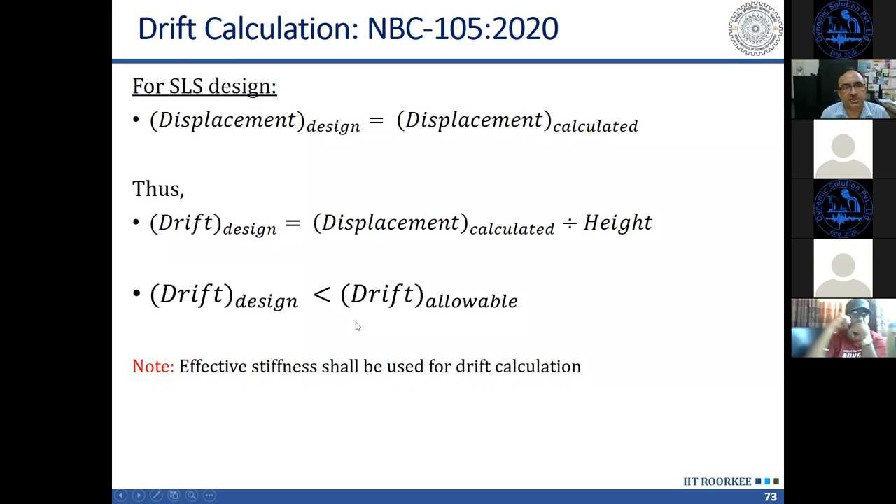What we have to check for serviceability is the drift check and no force check. So the drift check is to be done, and the allowable drift is 0.6%. So it should be 0.6%.

Again, the force we have reduced by 1/5. So if I multiply 0.6, it becomes 3%. So this is more flexible than the ultimate limit state at DBE, at ultimate load.

Generally it will be the drift at the ultimate limit state which will govern. The drift at the serviceability limit state will usually not govern because this is higher than that. The force we are reducing by 1/5, and the displacement we are reducing less than that, 3 point something.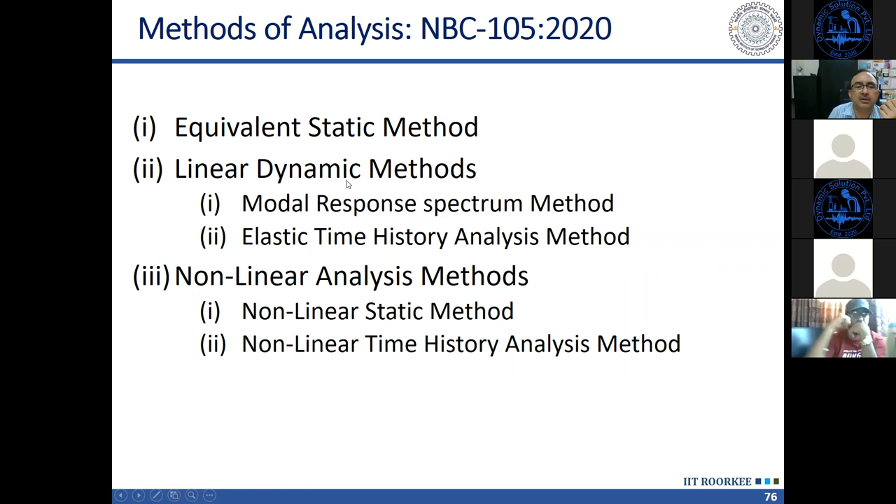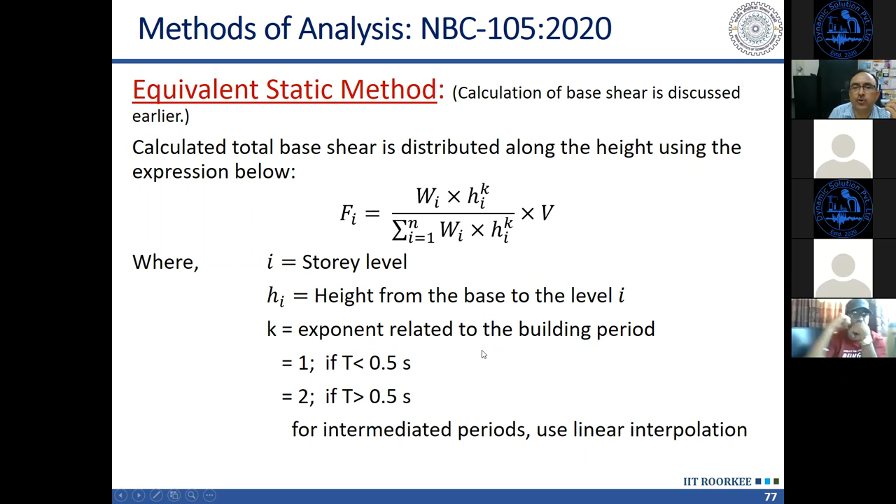Now we discussed these methods of analysis. Three methods of analysis are described in NBC. I have already given you the background of these methods. Once we calculate the base shear, it is distributed along the height using this formula in terms of floor load, and that floor load can be used to calculate the story shears, and then story shears will be used for design of the structure, the columns in the structure.

I just want to show you an example which will give an overview of all this we have discussed. In this example we are calculating base shear and floor loads for a 4-story building. This 4-story building has a simple plan, 3 bays in each direction, and the bay width is 4 meters, and the story height is 3 meters.

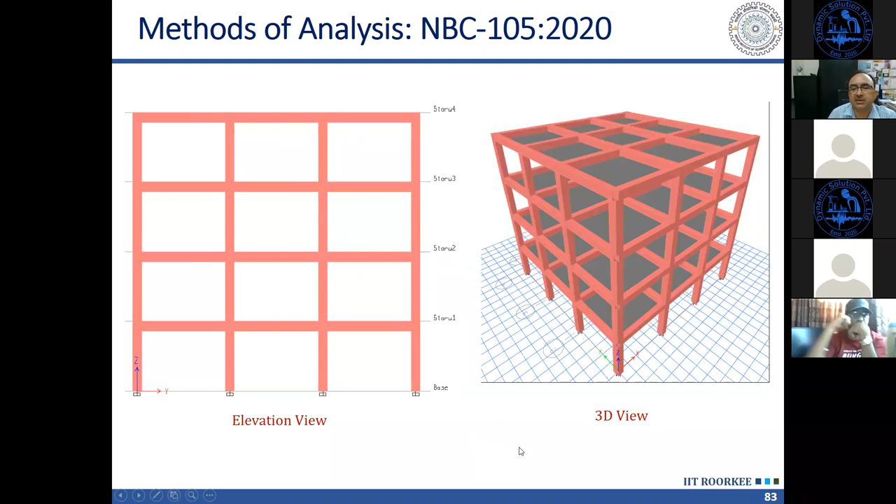We will use 3 methods. The first method is the equivalent static method. Before using that equivalent static method, we also have to calculate the weight at different floors. So here the weight calculation is done, where we are taking into account the percentage of live load.

We have assumed a residential building. In a residential building, the live load is such that lambda should be 0.3. That's why the 0.3 live load factor has been taken. And with that, the seismic weights at the first floor, second floor, and third floor, which are equal, have been calculated. And on the roof it will be different.

Why will it be different? Because we are having the walls and columns only below, and there is no live load also. So here it is coming out to be slightly more than 50% of that at the lower floors.

And then we have used the empirical formula given in the code. It is an RCC frame building, so the formula we can use has a 25% enhancement allowed by the code. KT is that coefficient given in the code, which is 0.075 for RCC buildings, and with 4 stories of 3 meter height, so 12 meter total height.

This comes out to be 0.604 seconds. And then the base shear can be calculated using this formula. For a period of 0.604 seconds, let us consider soil type A. We can calculate the value of CH looking at the response spectrum, and this comes out to be 2.1445. We have to multiply it by Z and I and divide by R mu and omega u.

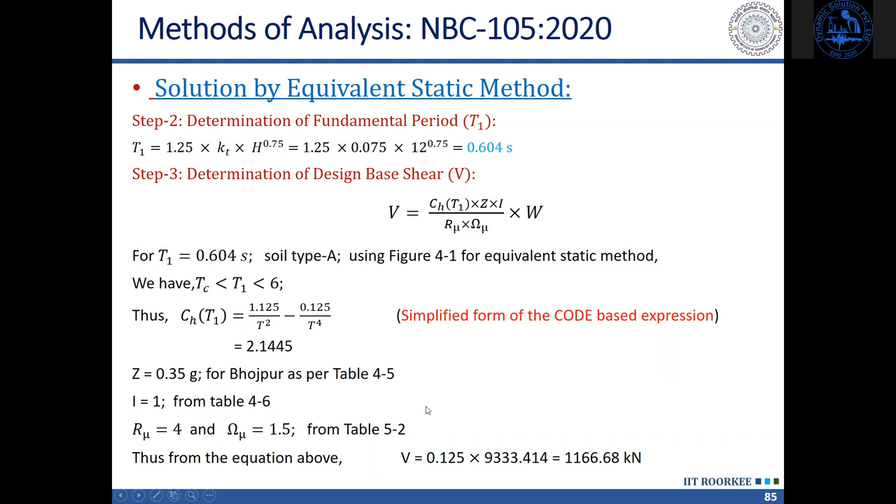So we calculate V like this, which comes out to be 1166 kilonewton. Then it is to be distributed along the height.

The distribution is in proportion to the mode shape, and here the mode shape is Hi to the power k, where Hi is the height of the floor. So for the first floor, height is H1, for the second floor, height is H2, H3, and so on. And the value of k depends on the period of the structure.

So the period of the structure in our case is 0.604. From that table, by interpolation, it has been obtained as 1.05. And if you use that 1.052, F4, F3, F2, and F1 can be obtained like this.

And finally, you check that F1 plus F2 plus F3 plus F4 should be equal to shear force, which we have calculated in the previous slide.

In the top story, the shear force will be, you can see that the forces are increasing along the height. The top force is 357 kilonewton. In the bottom story, it is only 129 kilonewton.

But if you talk about the column shear forces, which goes on increasing towards the base, because in the top story, only the top floor load, which is 357 kilonewton, is acting. In the third story, these two will be added, and this becomes 768. And then below, the 3 floors will be added, and here all the 4 floors will be added, and that becomes equal to the base shear.

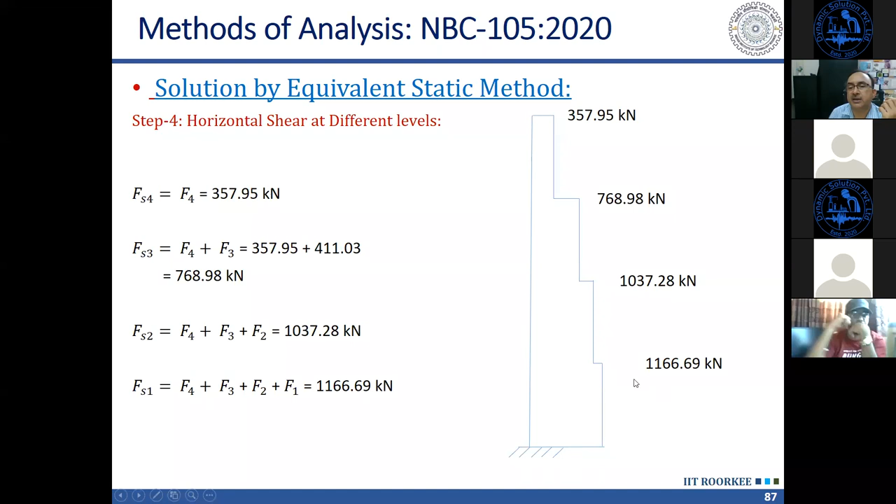1166.69. Then the same problem we have solved using a simple method to calculate stiffness. What is that simple method? We have assumed the beams to be rigid. That is an assumption. And if you assume the beams to be rigid, then the stiffness of the columns can be obtained as 12EI by L cube.

Okay, and Tajul, I think now I have got the error, why I was saying that our period is coming out to be larger. The number of columns is not 4. The number of columns is 16, 4 in each direction. Or you have considered mass of only 1 column. Tajul?

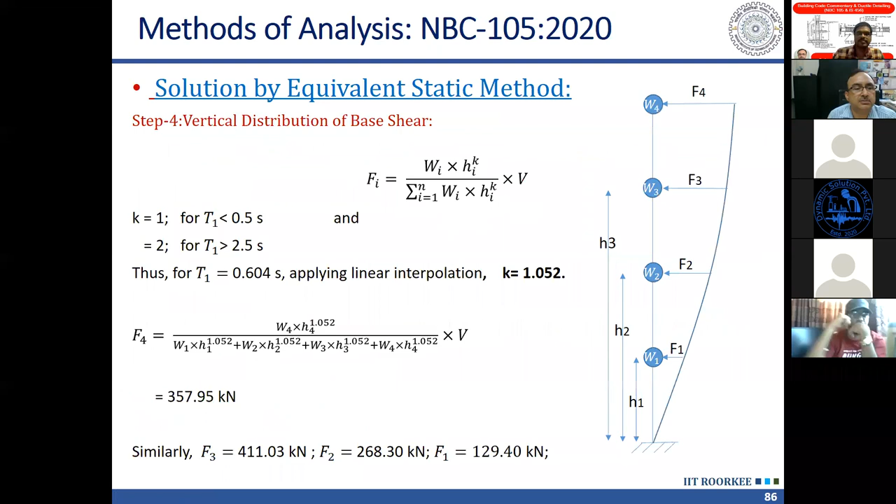So 12EI by L cube is the stiffness. If you are considering one frame, you will multiply it by 4. If you are considering the whole building, then you will take 16 columns, because there are 16 columns. And then this will give you the stiffness of 1 story. And then you can assemble the stiffness matrix of the 4-story building like this. You will get the stiffness matrix.

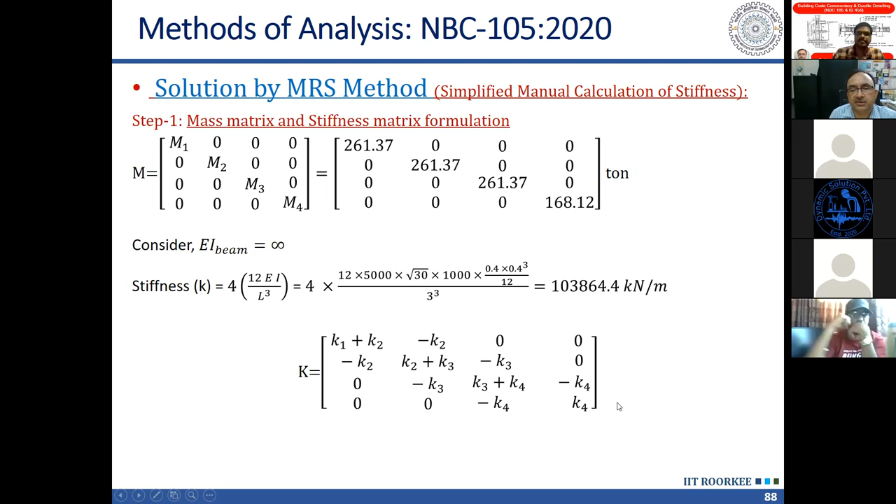So mass matrix is here, stiffness matrix is here. You can solve the eigenvalue problem. I'm sure at least some of you must have studied eigenvalue problem solution in a theory of vibration or a structural dynamics course, and the polynomial method has been used here.

This will give us the frequencies omega square in different modes and the mode shapes phi. So omega square is giving us the frequency of vibration. Omega is 2 pi f. So it is the square of that omega which gives us the eigenvalue. These we call eigenvalue and these we call eigenvectors. Eigenvectors are nothing but the mode shape.

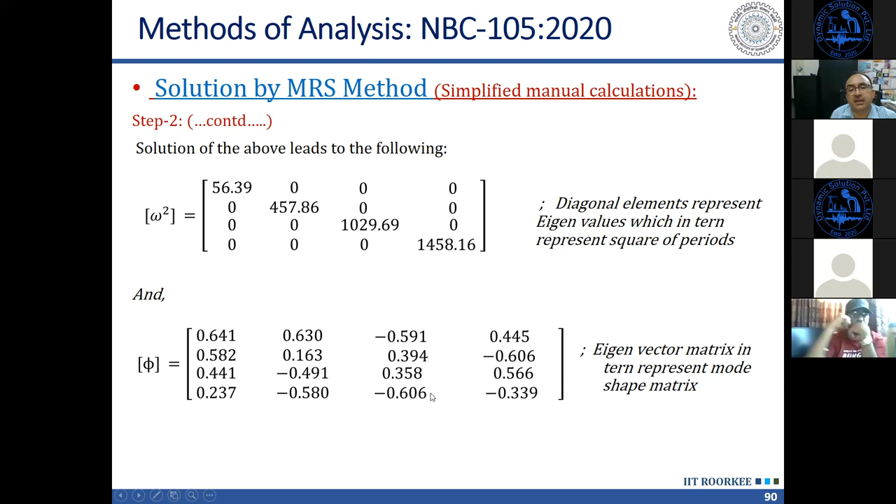So in the first mode shape, you can see all the values are positive. In the second mode shape, half of the values are positive and half are negative. In the third mode shape, it is negative, then positive, then again negative. Here it is positive, negative, positive, negative.

So if I plot these mode shapes, they will look like this. So these are the mode shapes. You can see the first mode, all values are positive. In the second mode, there is one zero value, meaning there is one crossover. In the third mode, there are 2 crossovers. And in the fourth mode, there are 3 crossovers.

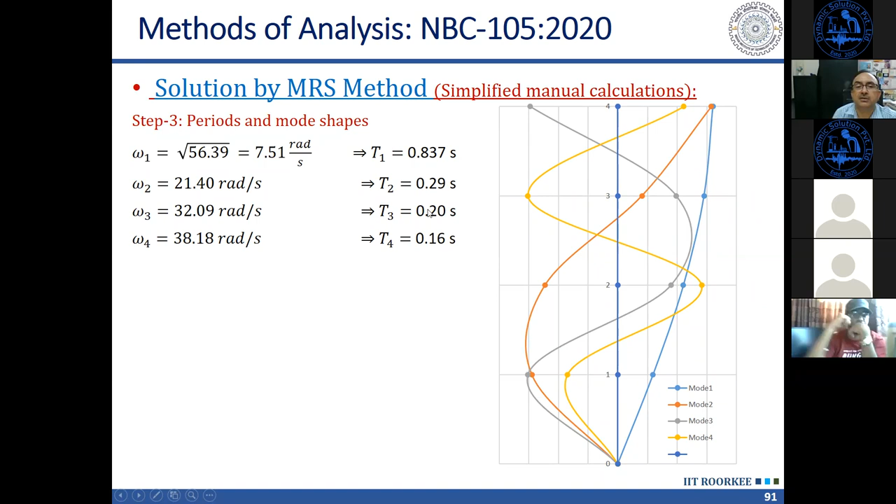And the corresponding frequencies and periods are like this. In the fundamental mode, we are getting the longest period. The first mode is also called fundamental mode. Here the period is maximum. And in the higher modes, the period goes on reducing.

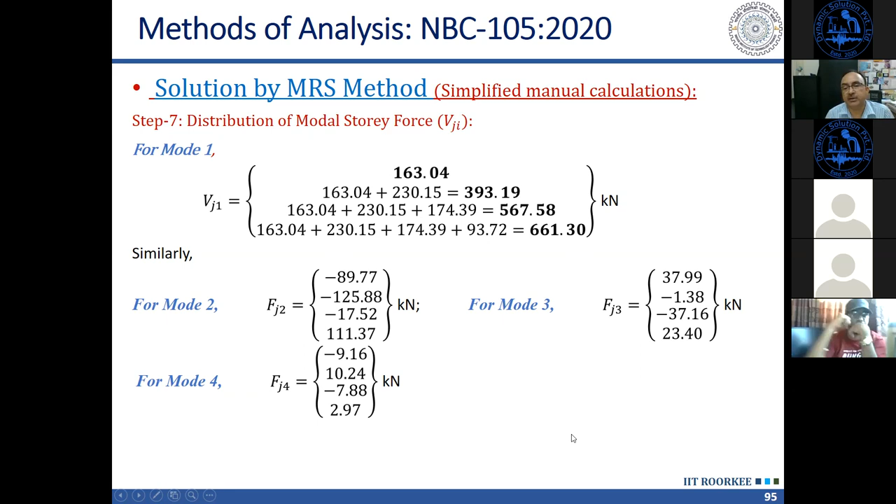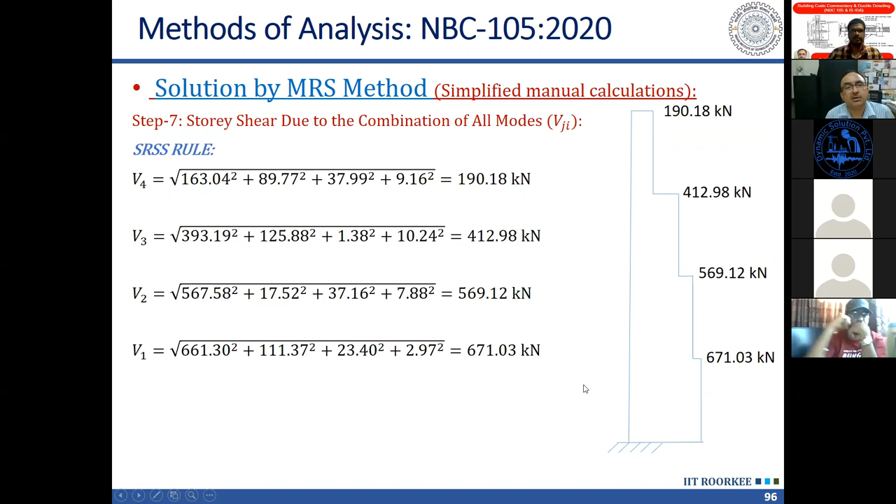In higher modes, the equilibrium may or may not be satisfied. So if you want to calculate the shear force at different stories, in the bottom stories we have already obtained it by summing up the different modes. In the second story, the story shear obtained in different modes is summed up like this. You can see we have got quite different story shear, and one reason may be our calculation error in the stiffness, using 4 columns in place of 16 columns, which gave a longer period, and because of that longer period, our base shear has reduced.

So all the forces you get from ETABS analysis need to be multiplied by a scaling factor, which is the empirical base shear divided by the analytical base shear. So that's the example which illustrates the procedure.

Lastly, just two slides on effective stiffness. What happens in case of RCC structures? During earthquake, there is significant cracking and yielding of steel also. Due to cracking, the effective stiffness of RCC members reduces, so we need to consider this reduction in stiffness.

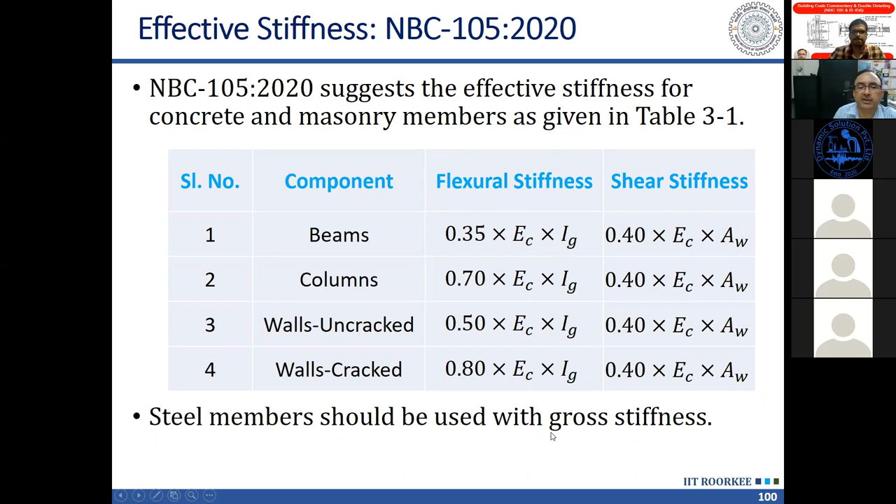In case of steel members, because there is no cracking in steel, we need not reduce any stiffness; we have to consider the gross stiffness. Okay, thank you.

That's what I wanted to discuss in this talk. In the second talk, which we will be having next Saturday, we will talk about the ductile detailing of RCC structures. That will also take nearly about the same time, 2 hours. We will discuss, and now we can take up your questions and queries.